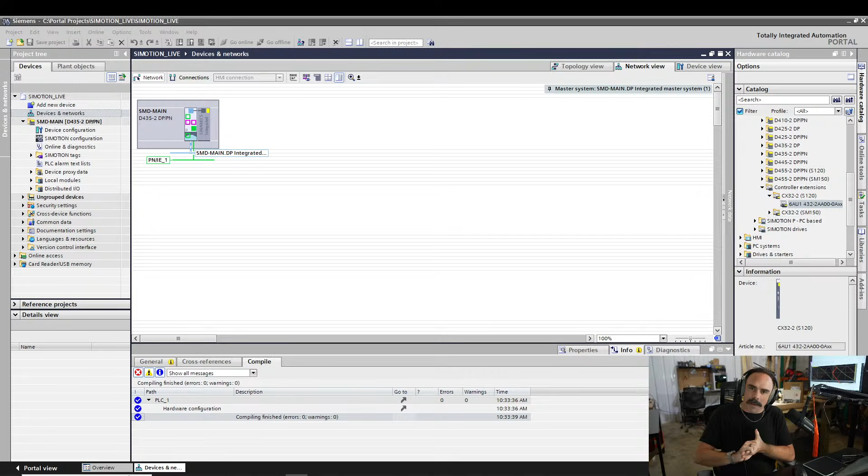The SIMATIC drive controller is a 1500T packed into the form factor of a CU320-2. So it's the highest and newest hardware in terms of the 1500T, because they repackaged all of this CU320 functionality into the drive controller. The old software, before TIA Portal, before anything, was its own software package called Scout, SIMOTION Scout. SIMOTION is a full automation system platform, not just a motion controller, not just for motion and drives. You can run an entire line, an entire plant off of a SIMOTION controller, because it's just a PLC with a high-speed synchronized bus to drive controllers. Inside the SIMOTION D, it's all CU320-2, so it's all that S120 hardware.

And so that Scout package, for the longest time, when you had TIA Portal, which, let's be real, TIA Portal was an absolute dumpster fire when it came out. Those of us that remember version 10.5 remember you couldn't even save fast enough before it would be crashing sometimes.

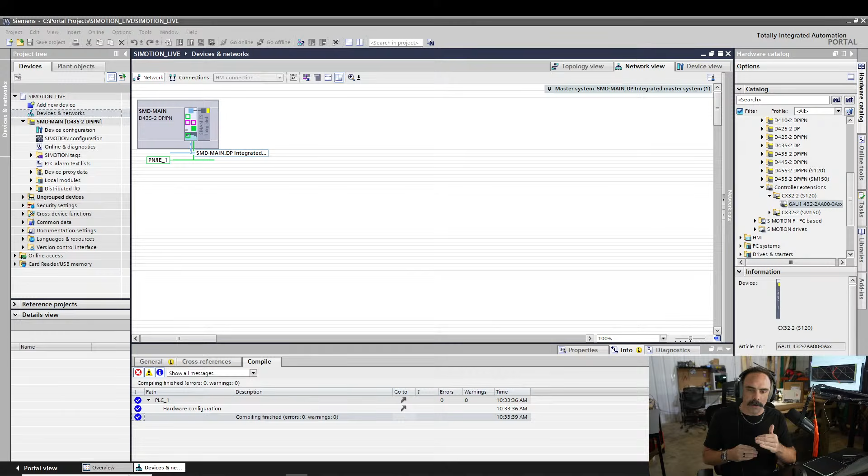Well, this version that we're going to be working with is what is called Scout in TIA. It's SIMOTION Scout integrated into the TIA environment, and it's kind of a halfway stopgap point. Let's be real. Here in a second, I'm going to open up the SIMOTION configuration that you see here on screen. I'm going to open this up, and guess what? It's Scout.

Basically, the only thing that it really did was take the tags and actually integrate those tags natively into Portal so that you could pass information back and forth between your HMIs, your different connections. Maybe you have some other Portal processors, something like that. It brings it into the Portal environment.

There was kind of a stopgap in the original versions of Portal where, what was it called? It was called a device proxy. Essentially what you would do is you would publish all of your 300 series tags, which the SIMOTION platform is based off of those 300 series processors. It would just export those into essentially a plug-in to where Portal could actually have access to those things. And it was really kludgy. You had to export. It was bad.

So this is Scout in TIA. This is SIMOTION in TIA, and it works really well. I was actually playing around, and this is the first time that I've started playing around with it, and it's pretty good.

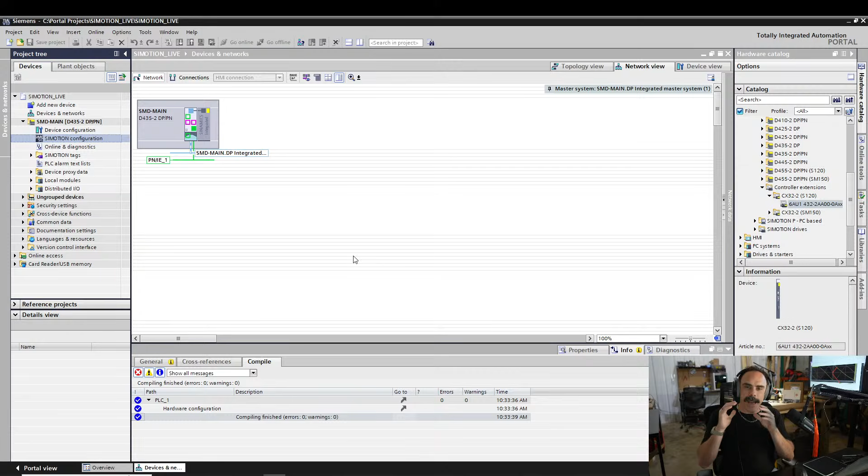And the only reason I was even playing around with it in the first place is because I had a customer I had worked with literally 10 years ago almost to get a system working and get them up to speed on Scout. I had a lot of experience with the S120s, a lot of experience with motion and all of this stuff. So I was like, okay, instead of you having to go through and take 3 or 4 classes to get up to speed on just the basics to where we can start talking about SIMOTION, I'm going to go take the hardest SIMOTION class, dive into this, and then sit down over the course of 3 days and just one-on-one get you up to speed on everything.

And so guess what? 10 years later, that system is now being upgraded, and they've taken this system and just run with it. And they've done an amazing job with just going through and taking what I was able to teach them in 3 days and really taking it to the next level.

And so I've gone back in and said, okay, how do we take this into the 1500T? How do we need to go to this? And so that's really kind of the only reason I've gotten back into the SIMOTION for this, is just because it's like, all right, they're moving and migrating into the 1500T. And so I'm kind of helping them out in that.

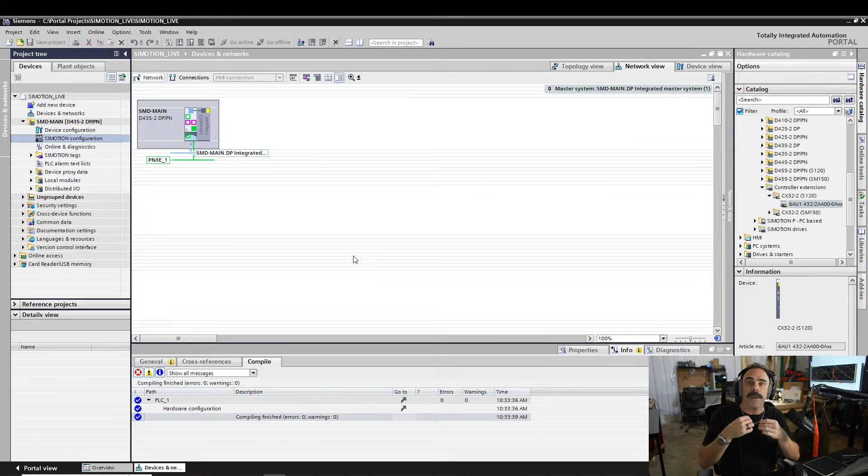So what I've done is I have a 21-day license that you could go out and download. If you have your version of Portal, you just need whatever version of Portal, and then there will be a SIMOTION Scout in TIA for that version. I'm using version 17 just because that's what they were using. And then you can, not download, you can activate a license for the Scout that is a 21-day license. And that is what I've done.

I've got 14 days left on it. And so that's why we're doing this stream this week. So Ali Reza, you can thank my customers for finally making this stream possible for you.

But so you can do this exact thing on trials. And again, if you're a member, you get access to this file. And if you open the archive, then it'll probably say, hey, you don't have this Scout in TIA package. So you download it from the support website, activate the trial license, and then you'll be able to open this thing up.

So TCPUs have been upgraded enormously. Yeah. Oh yeah. And the 1200 G2, Teddy's in here kind of talking about the new technology. New technology is just light years above where it is, because you have multi-core processors that have been in the TCPUs for so long, and they haven't even really been using them. They've only been using the other stuff.

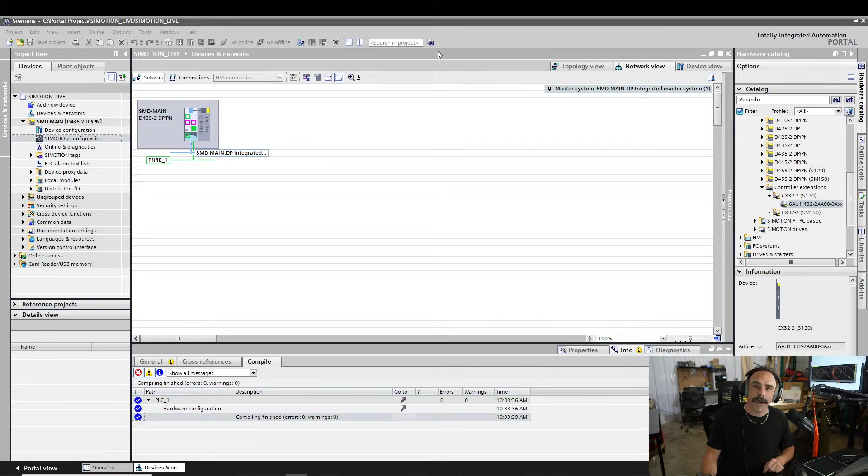So look at that. SIMOTION Scout. Oh, it's behind my head. Look. Oh, you missed it. I just got a little pop-up that said your license expires in 14 days. Just what we were talking about.

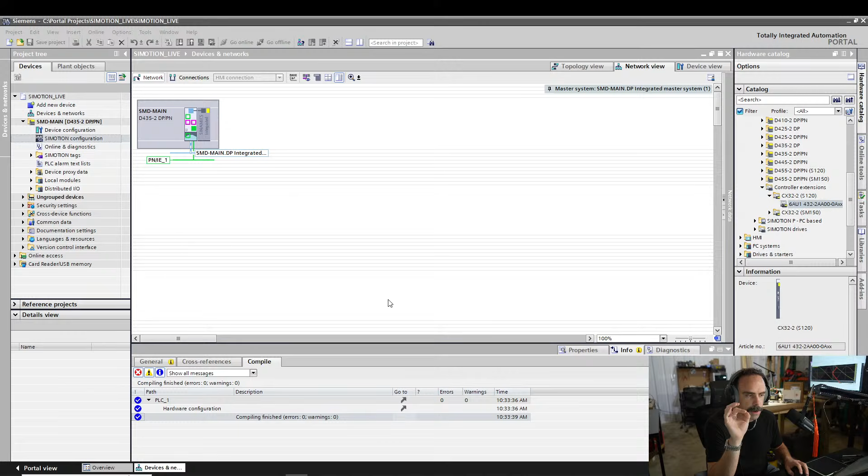So let's go through. And the first thing you're going to do is, again, we're talking about the SIMOTION D platform, and it has this integrated platform. When you have the SIMOTION in TIA, in your hardware catalog, under your controllers, you'll have your 1200, 1500, SIMATIC drive controller. There you go, Teddy, right there. 300s, 400s. Well, when you install the package for the Scout in TIA, you get this SIMOTION, and then it has all of your different options.

So I've just thrown in a D435 here, because, well, that's also what my customer is using. So yeah. And so I've thrown that in there, and I want to show one thing.

I'm sorry for constantly, my nose is a little itchy. I've got some allergies, some dust and smells and stuff here in this shared space or warehouse is making my nose go crazy.

But what we've got here, when we bring this in, this technically is the entire automation system. It brings in a 300T CPU, the PLC, and the default name on it is PLC1. So it's coming in as a 300 series processor and what is called SINAMICS Integrated. And that is a CU320-2, all built into this one SIMOTION D platform.

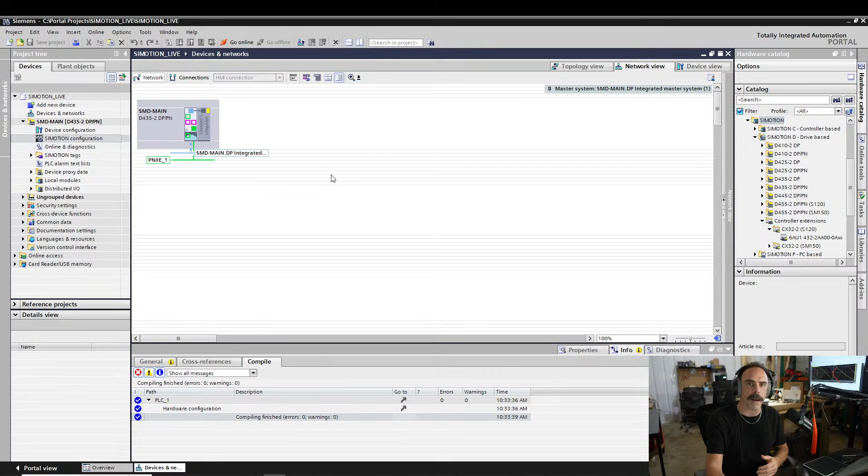And that's really all we need to do for right now, because you don't have to integrate the communication between the controller and that CU320. We don't have to do that. I'm going to talk later about if you have to use what's called a numeric expansion, or I guess it's not a numeric expansion, NX is on the SINUMERIK. It's the CX module, the CX32. The controller extensions, because CU320-2s can only do 6 servo or vector axes.

So if you need more than 6, which these controllers could absolutely do more than 6 axes of motion, then you're going to need more processing power. You're going to need more CUs. And inside this SIMOTION platform, it doesn't use the CU320-2.

It uses the CX32 module, and we'll talk about that a little bit. Actually, let's go ahead and talk about it. So if you need to extend that, you're just going to drag one of these in. And when you do that, you have your CX module. And then when you go to assign to your controller, this looks very different than what it would be assigning like a Profinet device to a TCPU.

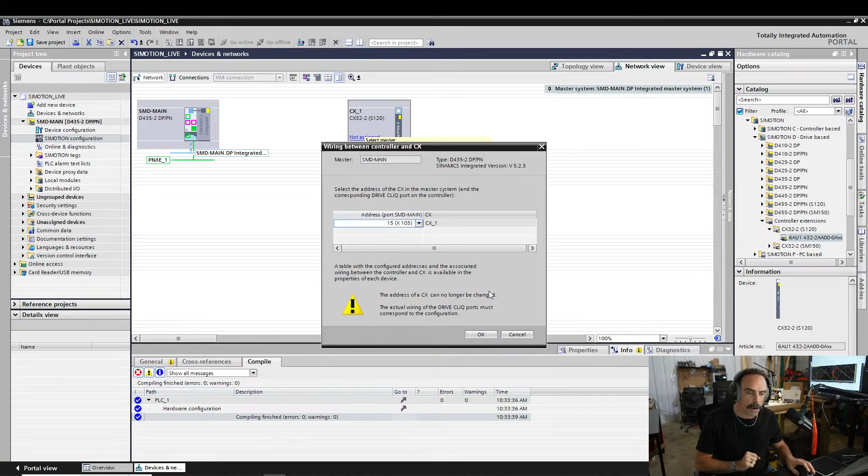And that is because this CX module does, remember that isochronous, that synchronized bus is Profibus. It's kind of like behind the scenes going on in this controller. So what these CX modules actually do is they hijack a DRIVE-CLiQ port, and then you're using the DRIVE-CLiQ port to kind of extend this high-speed bus. And so that's what this is about, what's on the screen right now. So if you're setting stuff up from scratch, you could just say okay, and it'll bring this in. Now, I'm going to go ahead and save this.

Now, let's look at the SIMOTION platform. Normally, you would just double-click on this. I've already opened it up because I wanted to make sure it didn't crash my computer. But here's what we have. And this, to kind of like the old school Siemens engineers, this looks very familiar. This looks like Starter, because guess what? It is built off of Starter.

And the big difference is because it has all of this other stuff in it, it has everything that Starter can do in terms of drive functionality for the S120s and things like that. Then it has all of this motion control processor functionality, and we're going to be going through all of that stuff. So take a little bit of a break, catch my breath.

How y'all doing, chat? Y'all doing all right? Because probably want to take in a deep breath, in through the nose, out through the mouth. Get that kind of like power breathing going.

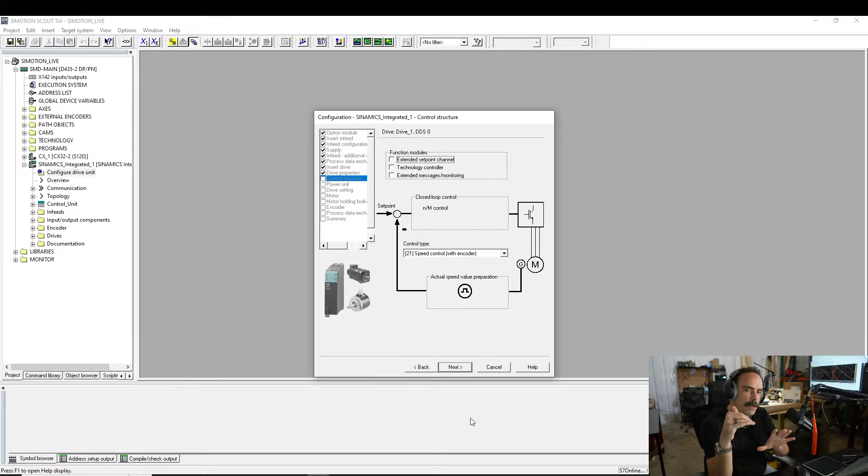We're going to select the technology, and if you notice, this is combining a bunch of the wizards that you would normally do. Normally you would set up your infeed by a wizard. You would set up a drive, a motor module, by a wizard. Well, this is combining all of those into one thing. So we're just going to do speed control with encoder. We're just going to click through these.

It's servo. These are usually the ones. Yeah, so this is the new one. So we've got the 080. So this is new hardware, new-ish. We want US units because we're in the US. I should do this because probably at least half, if not more, of you guys are not in the US. But for this, we're going to just use a DRIVE-CLiQ motor, like a 1FK7, 1FT7, something like that, 1PH8 with a DRIVE-CLiQ. We're just going to click next.

Obviously, all of this stuff is offline, so I'm not going to be able to show you online how to tune things. This is just the introduction, showing you how to set stuff up. And a vacuum cleaner is annoying. So let's just click through all of these and get through.

Encoders, again, this is exactly the same as you would do inside of Starter, S120, kind of the same wizard. If you've done these once, you've done it many times. So we're going to finish that. And now we're going to have an infeed and a drive, and that's really what we need. And just like in Starter, we could go through at this point and use this to tune and get our motors going as they should.

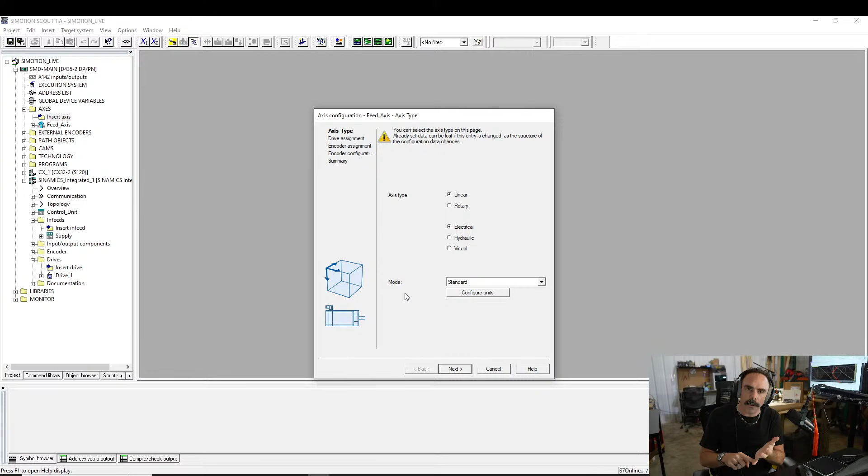In a linear axis, your units are going to be linear distance units: millimeters, inches, feet, miles, kilometers, whatever. Whereas rotary is going to be in degrees or radians, so degrees per second squared. And there's a reason why you would pick one or the other. I talk about those ad nauseam in the technology object streams, and those concepts are the same here.

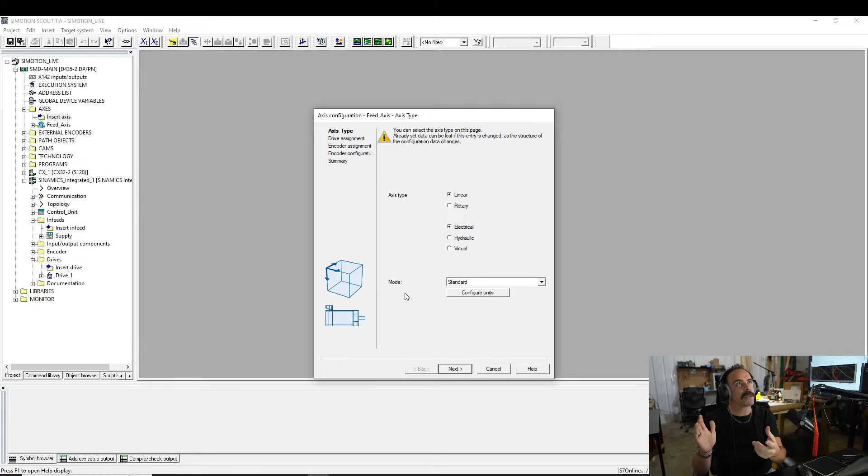Sometimes you'll want to measure things out like a roll, like a sheet of paper. You're probably going to want to do a linear axis for that thing that's measuring it. But you'll find that sometimes it's like, oh, my math works a little better if I do that in degrees, and then just convert the degrees to a linear unit based on the size of the roll. So just know that there are some times when you would go back and forth.

And just because it's a roll doesn't mean that it's going to be a rotary axis. Sometimes that roll is measuring out a linear distance. A lot of times people think, oh, it's on a ball screw, that's a linear axis, and then anything on a roll would be rotary. That's not the case.

So we're just going to do a linear, and this is going to be electrical. If you notice here, in a second, we're going to click this virtual button. We've done this before. Watch the Motion 102 stream where I actually go through the technology objects and set up on my demo unit back here, set up a cam, and it actually is going back and forth. And the only way that I can do that is by using a virtual axis.

Same concept here. Again, this is kind of the grandfather of the modern day technology objects. Same thing as in the technology object. You have to point that axis. A real axis has to have a real drive. You can absolutely skip over this if you want to just program it without an assignment. You can click here and then just say, like, you can unassign this.

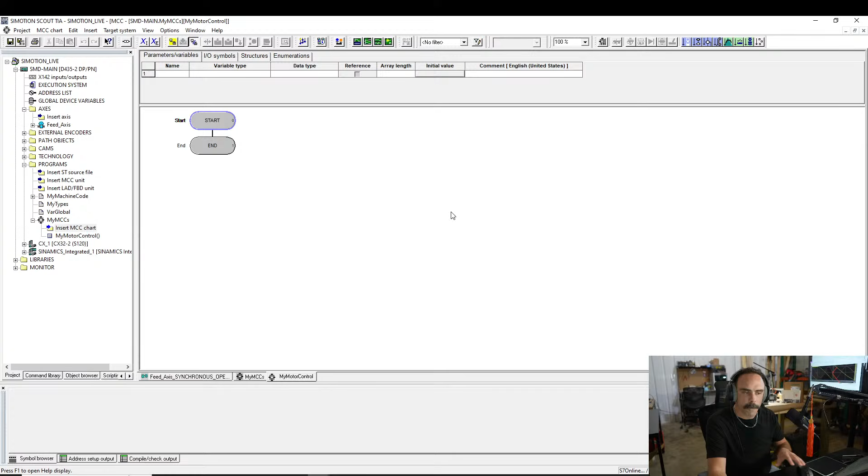Everything here is based on this flowchart structure. You come in and have these toolboxes at the top, with basic commands like if, then, else - program structure, that's the one I want. So let's make an if branch.

You come in and say, if, then I can enter a formula. If 1 equals 10 - which should never happen, right? So that's always going to be false.

Then on this branch I can put in something like enable my axis - switch axis enable on. I double click, and then select the axis for this. Very straightforward, very visual.

There's a reason Ali Reza said it's for lazy people - it's not that it's lazy, it's just that if you have basic functionality, if-then, here's when you want to start it, here's when you want to stop it, why would you not just click through and do it this way? And then that's how you do that.

Once that's finished, I can add in some sort of function like speed specification, meaning I'm going to run this axis at some speed. All you're doing is setting up all of your settings for that function visually. Pretty straightforward, fairly simple, but you can explore all these kinds of settings and diagrams.

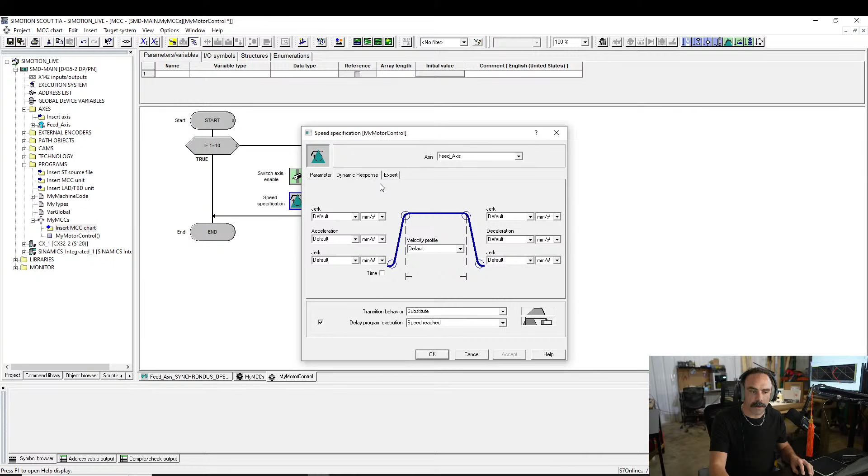So in this one, here's how you would set your speed, and you can select different variables, different things here. There's all sorts of stuff you could do - last programmed, resultant velocity.

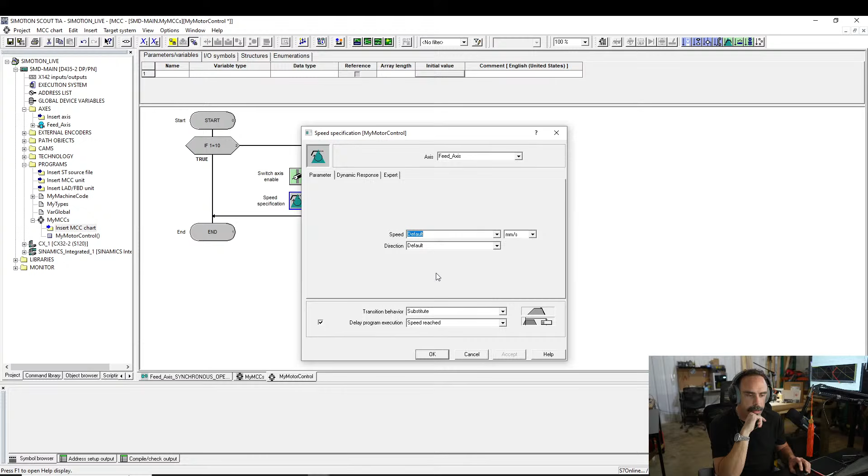I think it's not showing up because I don't have variables available to this, but that's going to be whatever speed you run at. Then dynamic response is going to be the ramp function for that function itself - you set everything up there. I don't know what's over here in this expert section.

Hold on one second... so yeah, so we say okay there.

So that's how motion control charts work, and they're fairly simple - you can go through and do all of these.

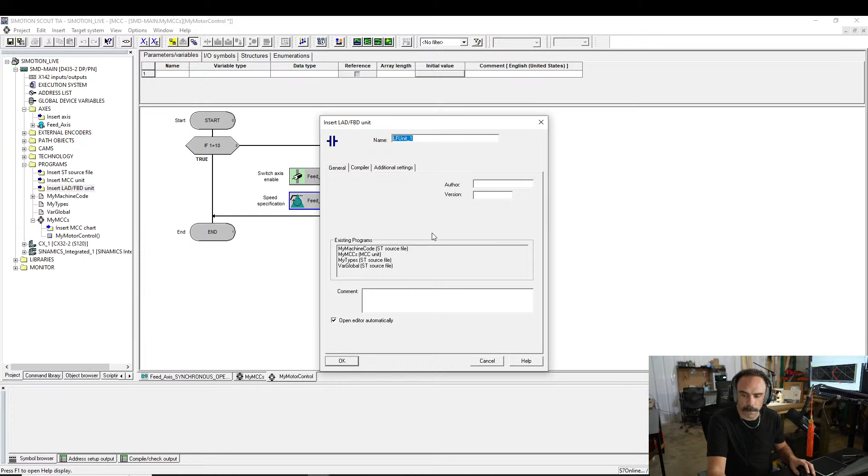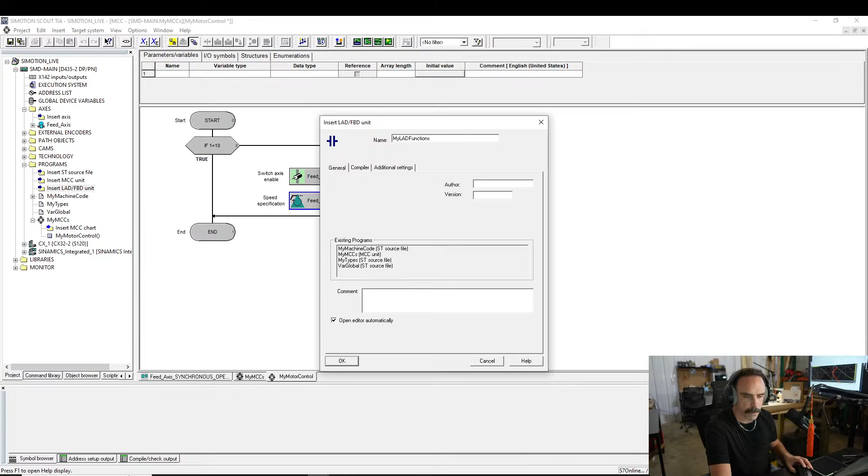Next thing is the ladder editor. I'll show you why you probably don't want to use the ladder editor. So let's go through this - let's go to my ladder.

Now we can go through, and the same way we did with the MCCs, we can do with the ladder functions - again, the creation type, is this a program, a function block, or a function? And if you'll notice something - nowhere have you seen the ability to create a data block. That's something very common, like, well, I need data blocks. We're going to talk about that in a second because it's not as straightforward, and I don't quite understand why it's this way, but I understand how to get around it.

So we're going to create a program and go into it. This looks exactly like your ladder editor in TIA, doesn't it? No, it doesn't - this is like some of the worst. This is quite possibly the worst ladder editor in the history of ladder editors. I can't even insert a network.

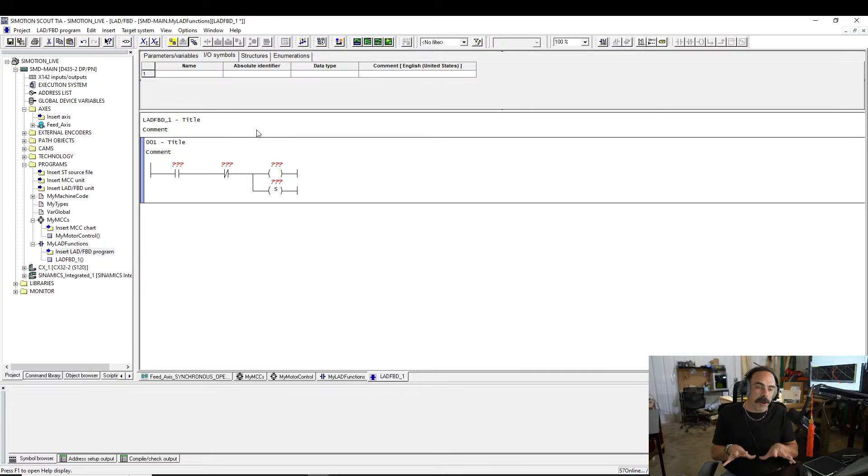Honestly, I don't see a lot of people using this ladder editor, just because there's so much better options, namely ST and MCC. The only reason you'd really want to use ladder logic is if you were taking push buttons and starting functions, with push buttons, IO, visually it can go through and do that sort of stuff. Because if you're using ST, why are you going to try to build some sort of math function in ladder logic? No. If you're using MCC, why are you going to trigger MC functions in ladder? You're probably not. So about the only thing you're going to be doing is sequencing, checking, is this E-stop here? Is this good? Those sorts of things in ladder.

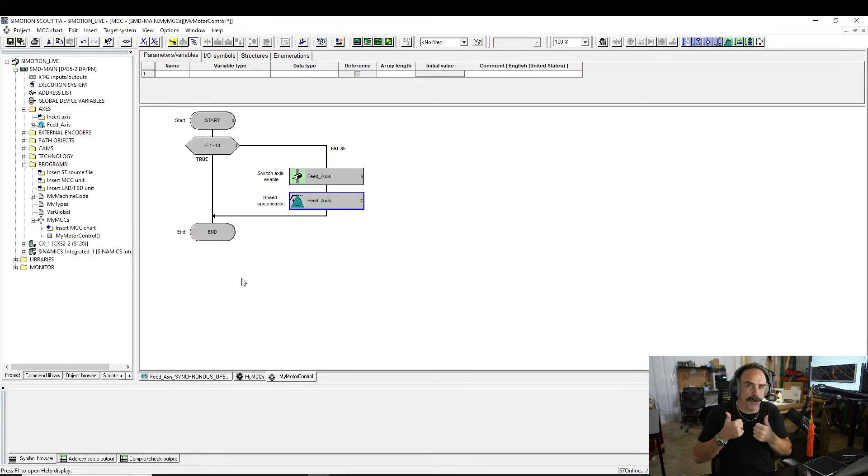I'm going to leave this here. Yeah, we're going to pretend that never happened. All right chat, we're going to pretend that never happened, cuz it was rough.

Sean's talking about the Mitsubishi ladder editor. I've fortunately never used the Mitsubishi ladder editor, apparently, because it's apparently horrible too. What's the Automation Direct processor? Not the Do-more, is it Productivity? Something like that. Anyway, it's pretty bad too, right up there with it. I mean, it's free, so you can't really complain if it's free, right?

We're gonna get into the real motion, real stuff now. Y'all ready? Because we're about to go into ST. And ST, my friend, by the way the music, I'm listening to EDM music and it's building up to the beat. ST.

ST is where it's at, and you're going to see it mostly across the board, because it is so much more portable than any other language we have. You have these code assist processors that use ST, all of this stuff. It's text based, and a lot of people are coming from ladder and these visual languages. They come in with no experience in text-based stuff, and that's kind of how a lot of us old school, gray-headed people like me, that's where we come from. We're coming from the non-text based stuff. Not me specifically, but most of us.

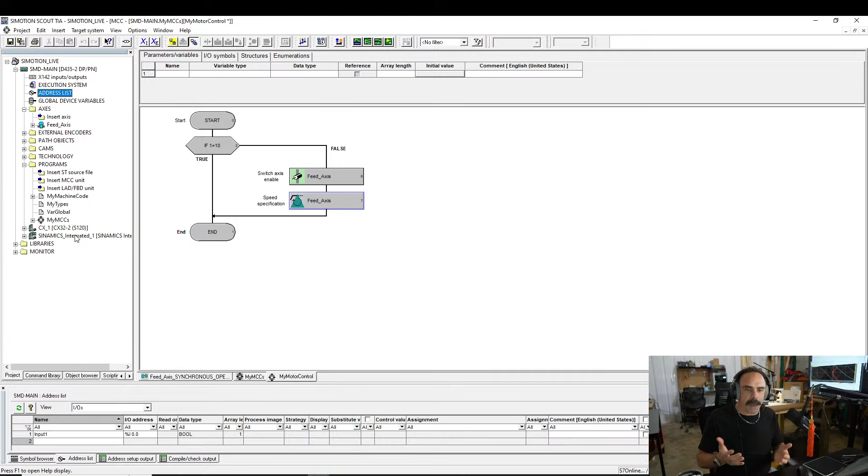That kind of sucks, because it just doesn't feel right, especially when you're used to every other system I've used. Maybe it's just the old way of doing it. You did this again on the 505 system, like in TISoft - you had your IO tables you had to set up. Why are we doing this? Anyway, end rant.

A little bit better way of doing this - and honestly props to whoever wrote this other code I've been looking through in different places. There's some better ways to do it inside the SIMOTION platform that are actually pretty good, and it creates portable code that you could take out and put into another device, redefine what these tags are in terms of IO, and start using those functions. That's portable code - the creme de la creme of programming, really.

Especially in motion control, you have a lot of different machines, different things, but most machines fall into similar patterns - you have torque control on an axis, speed control, gearing, camming. So from one flying saw to another, there's not going to be a lot of differences in the core program, just in the stuff around it.

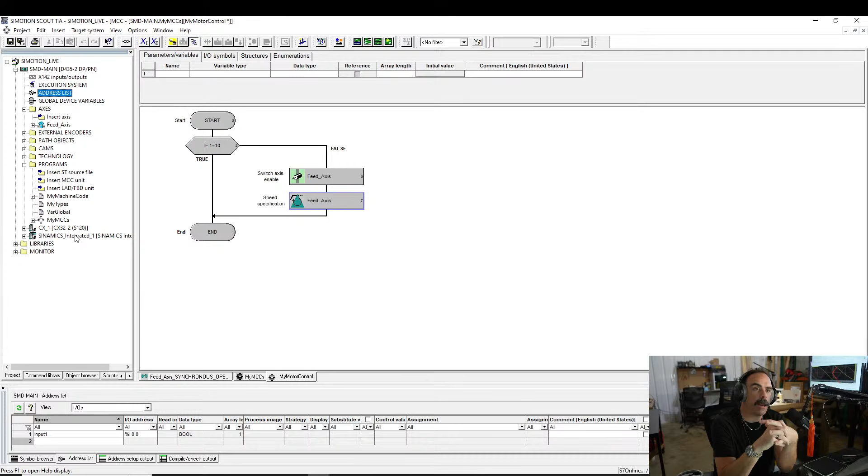Mika asked if ST refers to the same ST in the PLC we know, or SCL. In TIA Portal, on the 1500s, you have two languages that sound kind of like that. You have SCL, structured control language, the text-based language that looks like what we're about to do. Then you have STL, statement list, which is assembly language - machine code, hardware level, loading accumulator, transfer, add, accumulator to. It's rough. If all that sounded like another language, you're probably under the age of 25 - they don't teach that stuff as much as they did for old people like me.

So ST in this context is not STL, and it is not SCL - the two languages that are in the 1500 and TIA Portal.

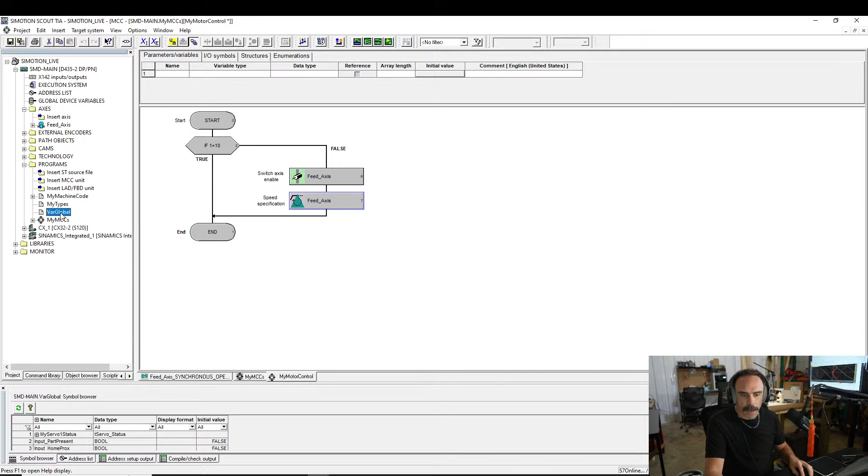SCL is very close. No, I'll talk about the difference. Let me just talk about the difference. So I'm going to go in first, and so I have this var global type or var global source file. And if you're not familiar with text-based programming languages, you're going to have files, and the goal would be to have one file that has a bunch of stuff that you commonly use, and then you have another file that's custom stuff.

And then you say, all right, I'm going to point and use all of this stuff, and then I'm going to have access to this. And then I can use whatever. And so as long as I have this file, it can run. So whenever I include anything, I just include both files to make sure that I have access to both files, and then I can run this file.

Okay? So instead of having DBs, which in the PLC land, in the 1500, you'll have a DB, and that'll be a global DB. And so that is access to data; any program that is running, any function, anything can have access to that data. And you do have that. You do have global device variables right here.

But again, they get down in this stupid thing that's right here to the side, this little thing right here. This sucks. That editor is cumbersome, it doesn't look good, and it's hard to step through and trace through. And so what I see a lot is, instead of using this global device variable and this address list, you split everything up into these global source files. And then you just include those in anything that needs those variables.

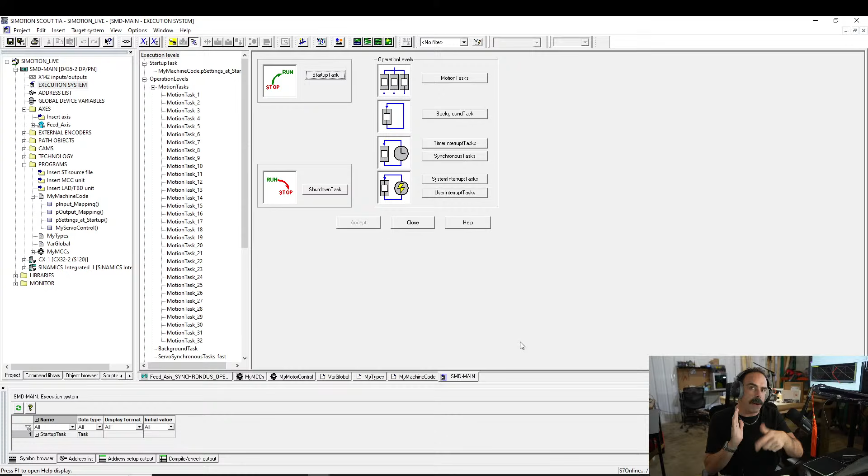That has nothing to do with the servo cycle. That has nothing to do with how fast all of the drives and everything are getting updated. Those are two separate things. And so if you have a 4 millisecond cycle time or a 10 millisecond cycle time, that means your main OB1 is running through every 10 milliseconds. And so it's totally fine to put stuff into main.

The problem with SIMOTION is you are running so much other stuff natively in things that are not in main, or the background task kind of has the lowest priority. And if you're unfamiliar with the way interrupts work, you have a process that's running and it's trying to get through this bit of code. And it gets to here, and this code over here says, hey, I have a higher priority than you. I need to run. And it says, okay.

And it goes over into this block of code, runs this, and then it goes back to wherever it left off in that lower priority, and then starts going through and says, oh, hey, I need to run over here again. And it comes back and then goes back over here.

And so that's, hold up, I just lost my battery.

So that is a thing that, the interrupt priority, it is much easier in SIMOTION to cause your background task to get really, really long.

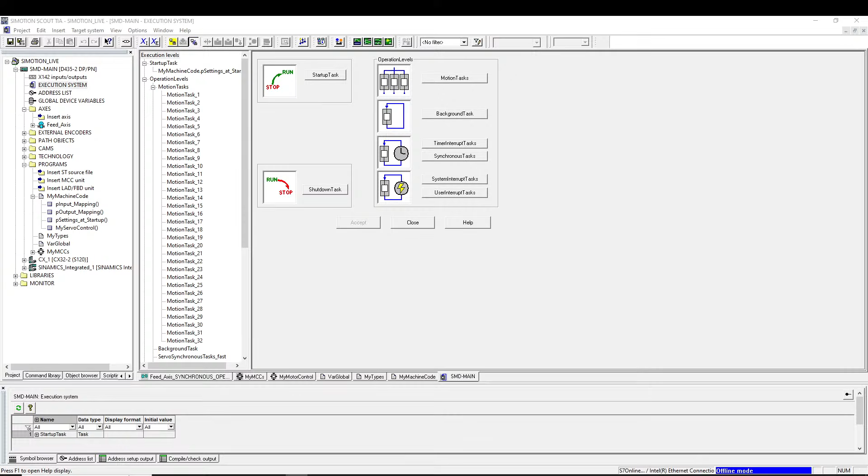Let me change my battery real quick. Little bit of a break. All right, that was much harder than it should have been. All right, let me get this back up and going. Not bad on that, guys. There we go. Should be good to go.

So Ignatius, my general from the African continent. So we got a question. Do you know how similar or different IRT over Profinet is compared to EtherCAT? So it's the same concept. I'm sure there are a lot of different things in the hardware and the network stack level. But the biggest thing is that you are synchronized. And so everything on that bus makes sure that it is synchronized into the right time.

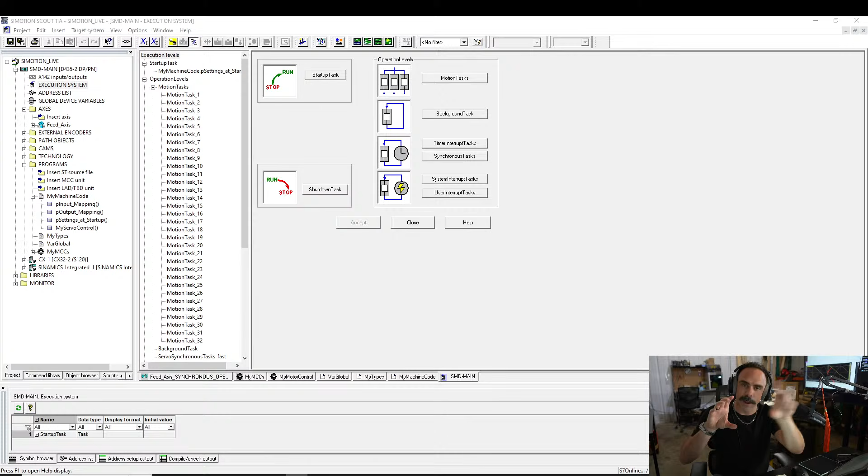And these interrupts are saying, hey, I've interrupted and I'm in sync. I'm syncing up at a certain amount of time. And so I'm always getting pulled over into this other synchronization thing. One thing about interrupts, if you don't have any experience with the hardware level architecture stuff, one of the rules of interrupts is if you're using an interrupt, get in, get out, don't mess around.

That's the rule. And the reason is if you try to do too much in an interrupt, then you're going to have a bad time. You're going to start interrupting interrupts, and then you're going to move into situations where all... right, there we go.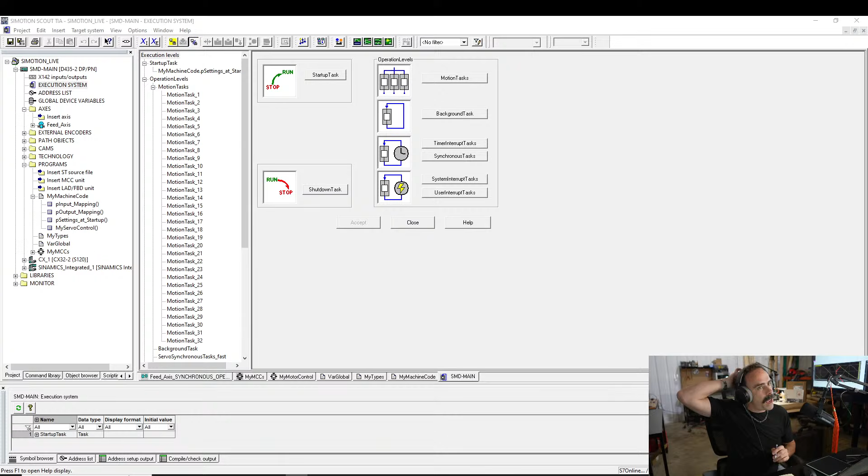We're going to move into a situation where you overflow, and it's a possibility that your background task or your main starts to overflow, which means if you interrupt an interrupt, you're going to have a bad time, especially if you interrupt by the same interrupt. If the same interrupt interrupts itself, you're done. It's dead. You're lost. Literally, your process goes away because it will never complete, because you're always interrupting yourself, and so it just goes off into nowhere.

Oh yeah. So Lucid's talking about a couple of good questions here. The first gen were pretty bad, had a lot of motion in it, eventually changed it in the second gen. Yeah. So Lucid, just in terms of the first generation T processors, 15T processors, and the second gens.

I still don't exactly know what those issues were, but talking about using two cyclic interrupts in regular TIA programming: if you have a 100 millisecond interrupt that goes off every 100 milliseconds, and if they're the same length, try to offset them. There's a phasing parameter that's set by the first scan. It sets that system time, and it'll phase those out so that they actually get updated. The problem is if you're doing that, then your data is always one scan out.

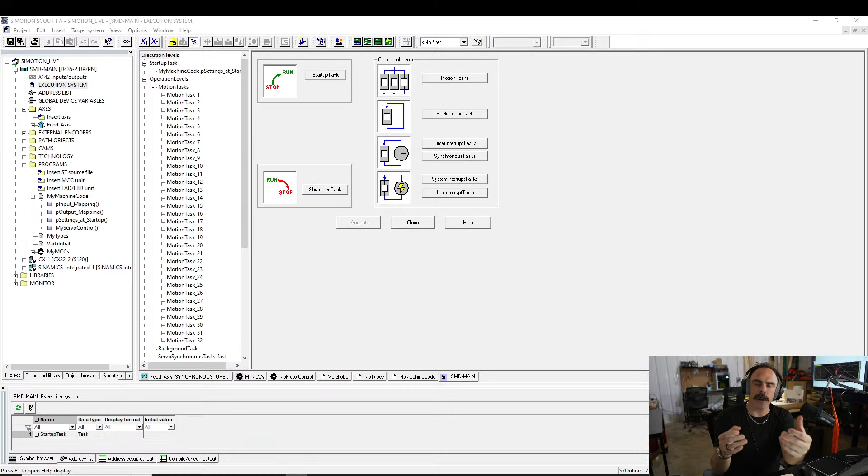Well, with a synchronous bus, you're wanting everything to be synced up. On all synchronous buses, all of the peripheral devices gather their data and then have it ready on that synchronous bus, and they have a time slot that they're taking. On the bus they're not having to call up the actual regular communication stack; it's sitting there waiting. They just put their data into that slot. As that data is coming across the bus, it just comes in and then it gets dropped in.

So that's the secret sauce behind SIMOTION and why it was so powerful, because serial data is so obnoxiously slow if you don't have synchronization like that. You're literally queuing up all of the data on these two wires on Profibus and stacking the data. Instead of sending out all this data, it's timing this guy so it shoves all of its data onto the bus at exactly the time. By the time it gets to the processor, that scan cycle is exactly packed and synced up, and boom, drops it into the processor.

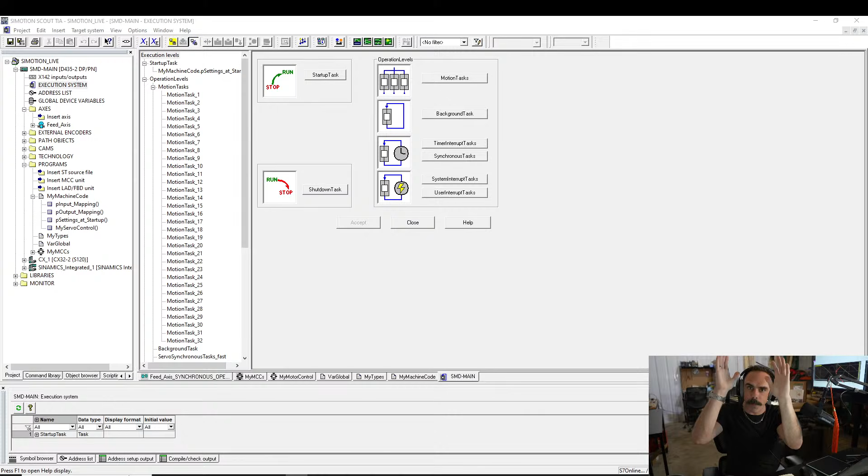Immediately at that point, it will have this servo scan cycle, and you do all of the updating and information in that, and then go back and go from there. If you're using a motion controller, the point of using a motion controller is to control motion. That's why most people will have a secondary PLC for most things, doing regular IO. It's passing back and forth like, okay, we're ready to go, you can do your motion. Cool. And then the motion processor goes around and does that.

So let's talk about putting these tasks into something. Just show you real quick. Let's click on our startup task, and you can see all of our programs that we have available to us. This is our startup task. I want to load, all you do is just click over. I'd already done that, but P settings at startup. Just click, I load it into this, I say okay, and it's there.

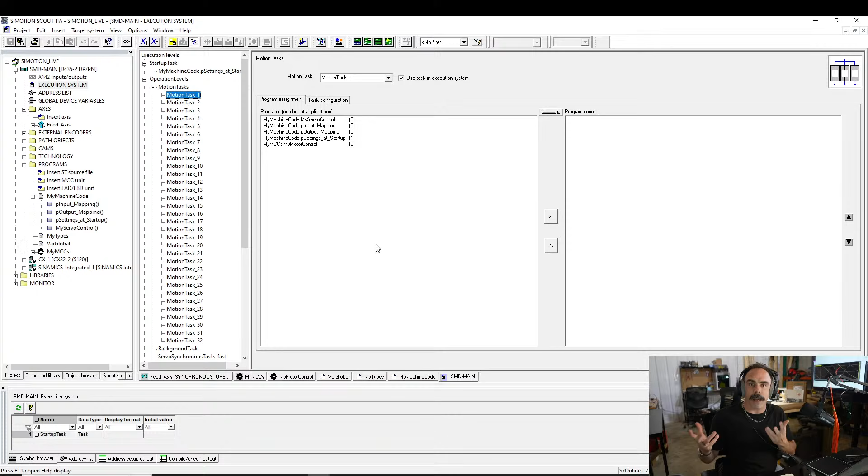Now, I'm going to go into motion task 1. And you say, okay Jason, what is a motion task? Well, the thing about a motion task is it can be in parallel. So these can be infinite. A way of organizing in SIMOTION is if I have my motor control, which is my motion control, it's an MCC chart. Where is that? My motor control right here. I can use that in task 1, and then I can loop that.

So if I wanted to go into this and put here a while loop, like while, like this.

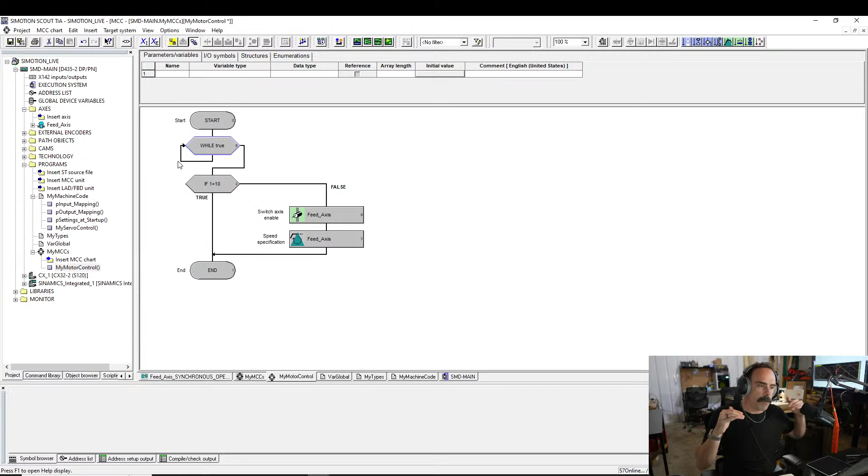How do I get that out? Anyway, you could put that while loop around there and just have it run infinitely. You can absolutely do that in a motion task. It's not going to kill you. It's not going to hurt you doing that. And so basically when you want to start up that motor, start it up, go through, you do that.

A better way, instead of having an infinite loop like this, is to have some sort of flag that says while shutdown not equals true. So while it's not in shutdown mode. In your startup subroutine, you set that flag to 0, and it doesn't ever get set until you are trying to initiate a shutdown.

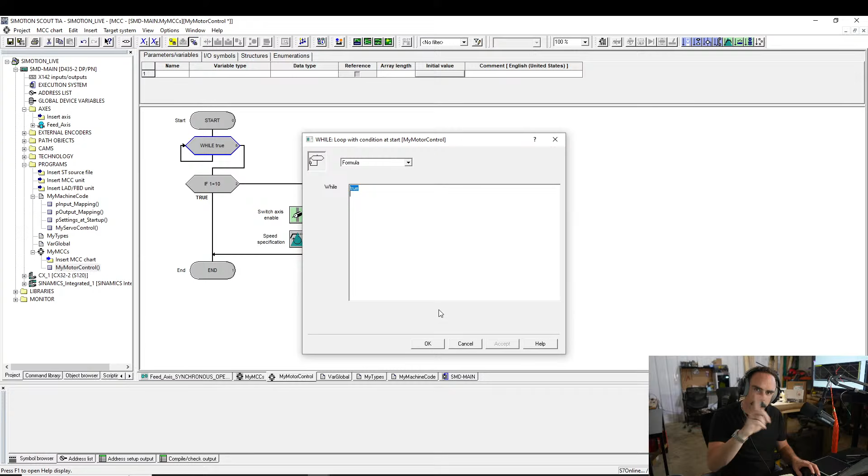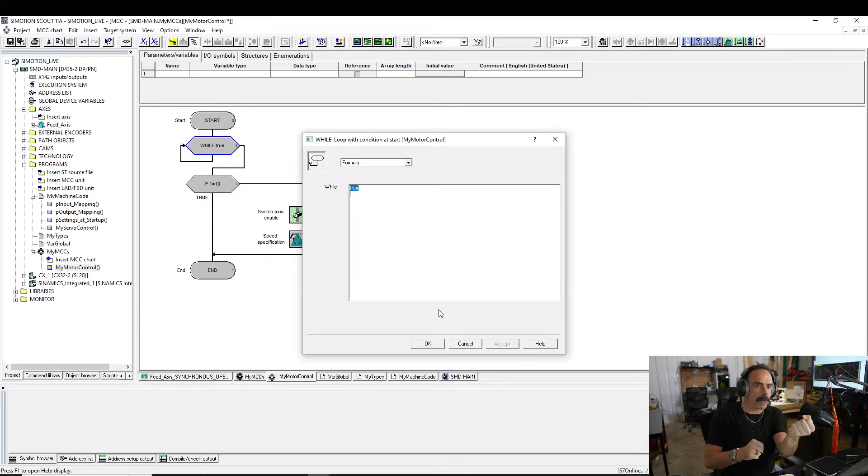And then outside of that, you can do shutdown motion stuff, because there's a little bit of a difference. You saw that shutdown task. Yes, you can go through and gear off motors, because if you go into that shutdown task, then it's going to run through all of those things. But remember, you're not always going to be going from run into stop, right? That's the only time that task gets done.

So that's a compile. I don't even know if that works, but yeah. Let's go back over here.

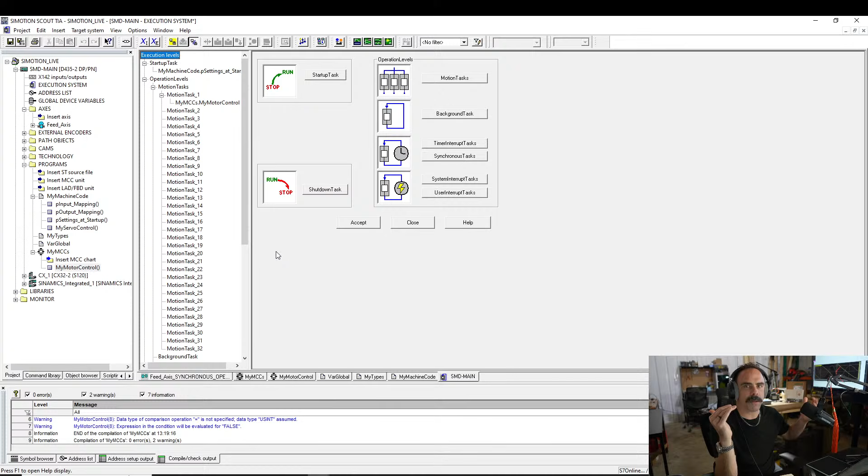So our execution levels. This run to stop means your processor is going into stop. So on your normal shutdown of your machine, like on a Friday, you're gonna hit stop, shut down machine, and it's gonna need to sequence out. So you can either control those motion tasks, where it gets activated and then goes through, and then have a shutdown task that's pulling things off, or you can have some sort of flag.

But either way, those motion tasks can run, and they can sit there, and they can update, and they can do things. It's kind of like taking, inside of OB1, a block, like a function call, that has the possibility of being only called once, and it runs through once, and then it's fine. But then it can also go through every time, you know? So just know that they can be parallel.

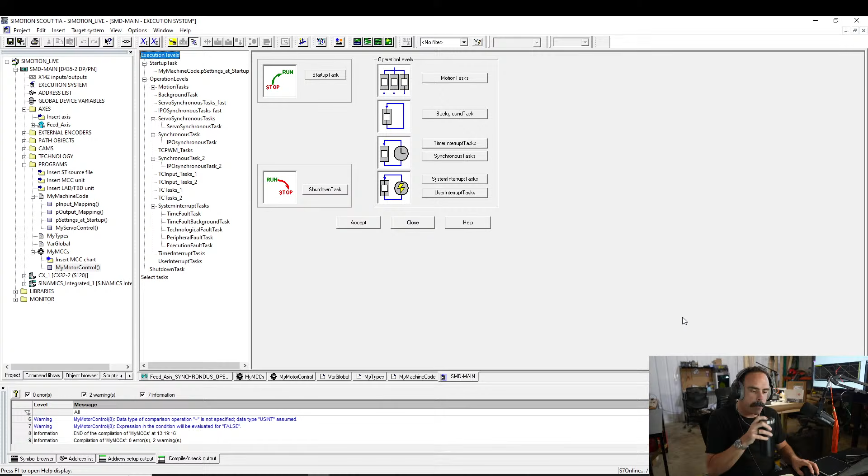And then the last ones are going to be the synchronous tasks. And those are going to be the most important ones in terms of what we're talking about right now. Because there's two synchronous tasks that I want to talk about. So you have a servo synchronous, which, to go ahead and tell you, don't put anything in here.

This is the one that has the highest interrupt priority, and if you want to Christmas tree this thing in the middle of your process, which means all the lights go on because everything stops working, it just wigs out. If you want to do that, jam a bunch of stuff into the servo synchronous, and at some point you're going to put enough crap in there that it's going to interrupt itself, and then it's gone.

So what you should be putting things into is this IPO synchronous task. For example, if you want things to update at a certain rate, no matter what, and for all of your machine data, this would be comparable to your pre-servo, post-servo type things, if you're familiar with those. If you're not, don't worry about it. If you want to make a decision based on some sort of input, output, signal, and make sure that it's getting updated at the same rate as everything else, you're going to put it into this.

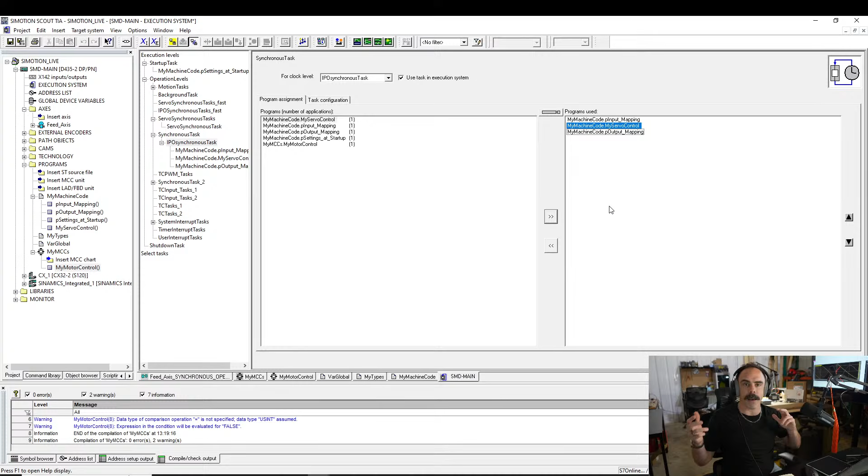There we go. And then I'm guaranteeing that this stuff is getting updated every synchronous cycle. Now, if I get too much crap in here, and my servo synchronous cycle starts to interrupt this, it's not going to crash. It's just going to cause problems where my servo might be getting data that's not quite updated in terms of the inputs and outputs.

All of the technology object stuff, that's going to be fine. It's going to have the encoder, it's going to have all of that information. You're going to be good. But your data might not be synchronized properly if you put too much in here. So you want to do things that are really low priority, like an LED light, because we're talking on the order of, say, 1 to 4 milliseconds of updating on the servo cycle.

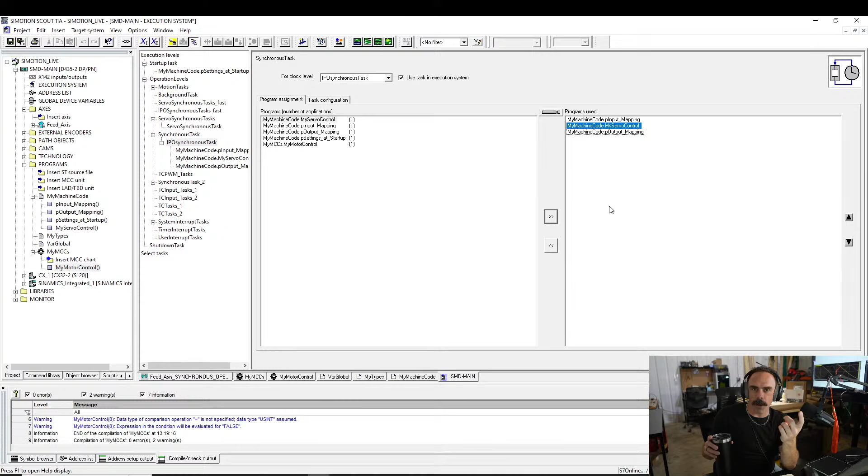And then if it's really updating fast, your light might be 10 milliseconds getting turned on. Your eye can't even perceive the difference of 10 milliseconds. So that sort of stuff should not be in your synchronous cycles.

So, wow. It's 2.5 hours. Oh, goodness. I thought this was going to be a quick stream, honestly, because I thought I wasn't going to be able to talk long about this stuff.

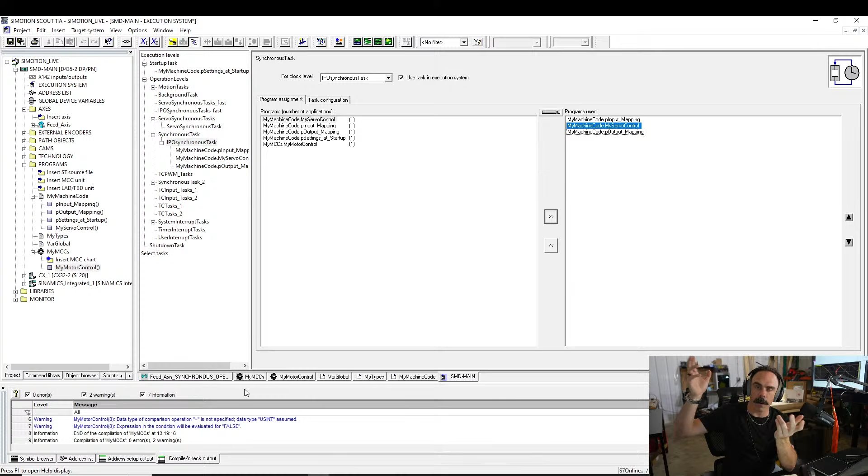So, I was wrong. I wanted to talk about how to trigger a motion task, because remember, we said there is a possibility that this thing just runs once and goes out. Well, what if you wanted to re-trigger that? Because that motion task gets triggered once. Let me look at this. I double click here and go to task configuration.

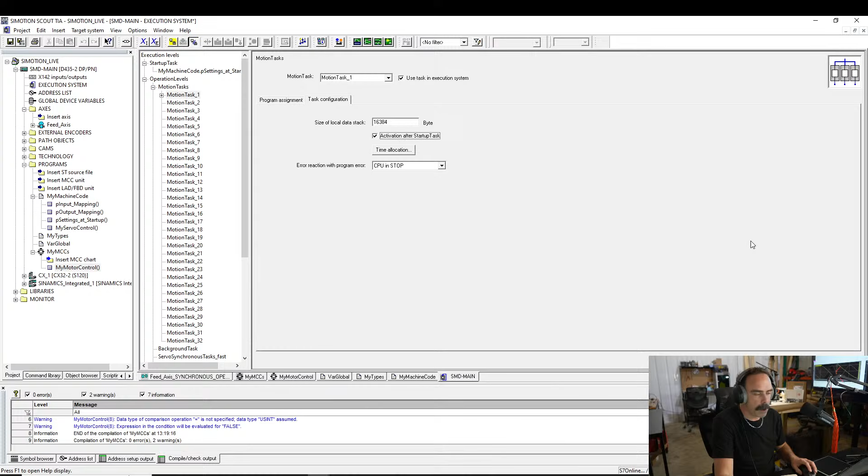If I don't check this box and I never activate or trigger that motion task, then it's never going to run. If I check this checkbox and say run this task once at startup, and I don't have some sort of loop inside of that motion task, then it will run once and fall through, and you have to re-trigger it. I'm going to show you how to re-trigger this. I'm here in the program execution system and the task control commands.

So if the motion task is in there and it's running, in the middle of a motion task, this will do nothing. It will continue to run. If you start that task and it's in the stopped state, it will start that motion task, and it'll run whatever is set up in your execution system for that motion task.

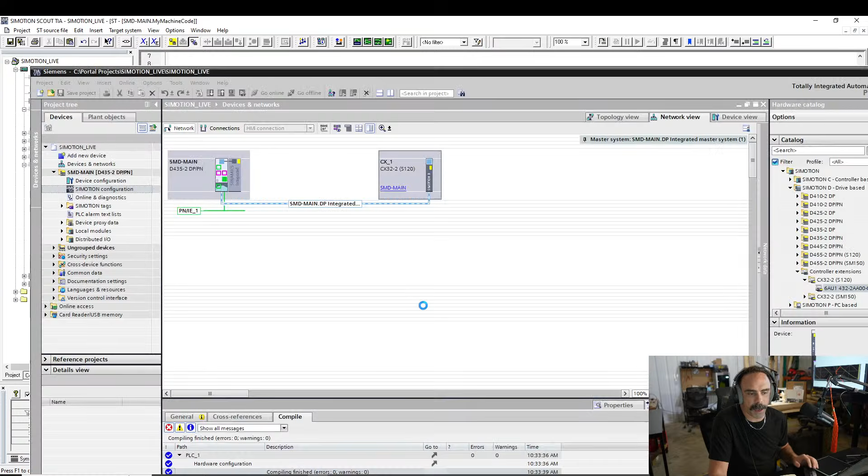I'll show you. So we're going to click save and compile, and it's going to bring all of that information out here. It compiled, and now it's done. Okay, we go to SIMOTION tags.

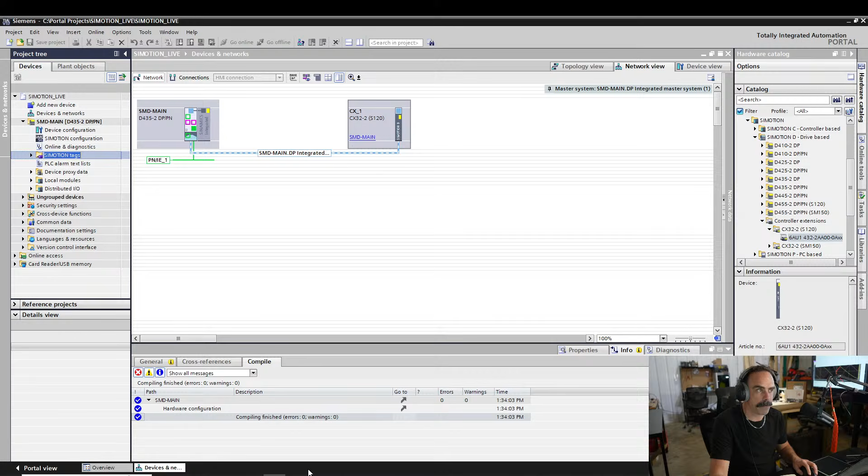And my computer's going to die. Are you gonna click? Oh, it might be dead. It might be dead, chat. Oh, there it goes. Oh, it might be dead. I'm just gonna listen to music. I don't know, chat, it's dying a slow death. Are we dead here? Oh, it's not looking good, my fans started on. So what you would normally do is find the mouse. Which screen is the mouse on?

Okay, it's not liking this, chat, but anyway, you would go to the SIMOTION tags, and all of the tags that are in those different groups, like the source blocks, anything that we created, a tag that was inside of that, would be available to use just as a regular tag.

And hopefully, are you gonna live? Are you gonna live and show me the thing? Or yes, okay, woohoo! So we're gonna double click show all tags.

Oh, it didn't like these. Why didn't it like these? What? Okay, be fine, anyway. So I click on this, right?

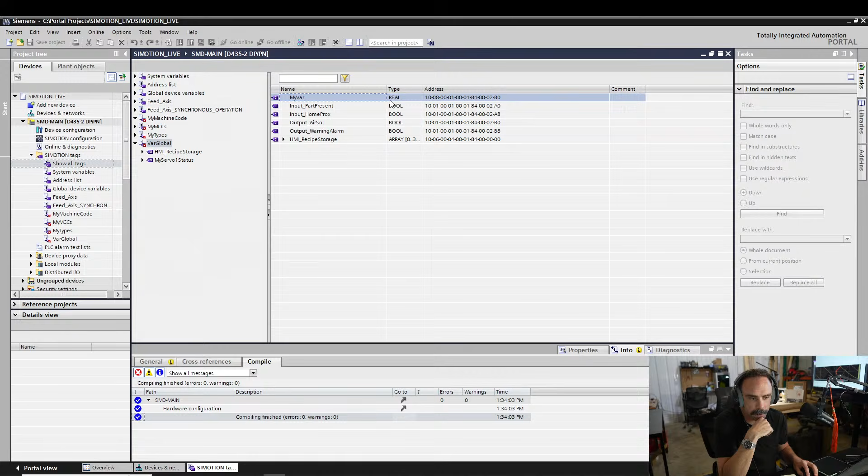I have the ability to drag and drop from here. So here's all of my tags. And there's an interesting little thing about this, and I want to show you this. See this crazy address, some weird stuff, whatever?

Yeah, it's crazy. Here's the thing. If I come in, all right, I'm going to throw an HMI in here real quick, okay? I really have to pee, by the way.

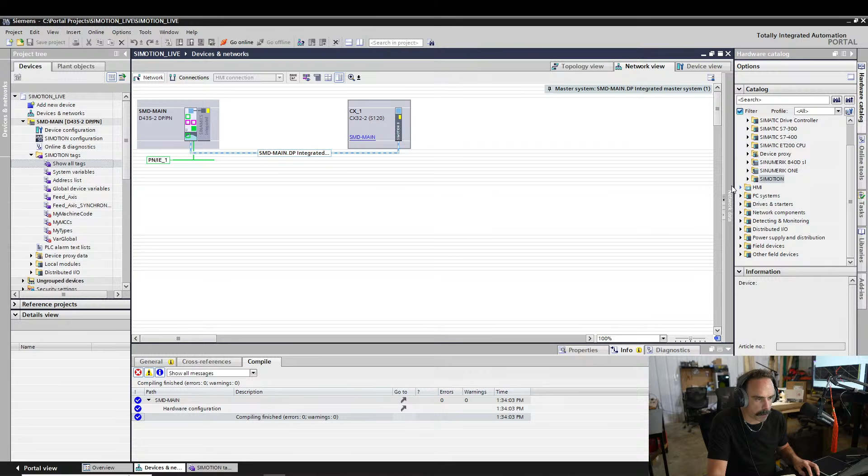No, we're not using a basic panel on a SIMOTION system. Who would do such blasphemy? Oh, this might kill it. All right. Hopes and prayers, prayer hands in chat, prayer hands in chat. Okay, it made it. It made it. All right. So we're gonna go through and make a screen.

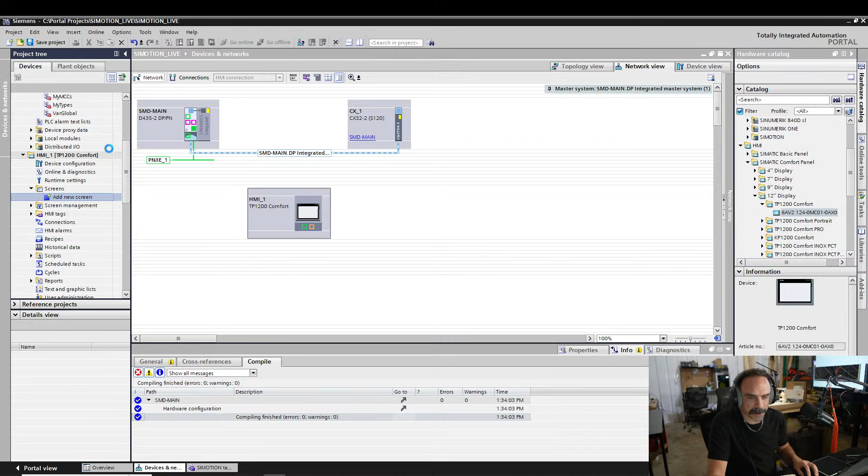I'll show this to you real quick, how you can actually use this stuff. So you have like var global. Ooh, I'm clicking way too fast. But I could go through and be like, here's my home prox, and just drag this in here. And it makes that link. So you can see the properties on this, that it is linked to that crazy address.

So I'm going to talk about how this is possible, and apparently it's not just straightforward. This little HMI export here is based on something that I skipped over when I was talking about it before. But if we look at these retained variables, which you would want for most of the stuff on the HMI, like your settings, you have this setting that says HMI export equals true. I have it commented out, all right.

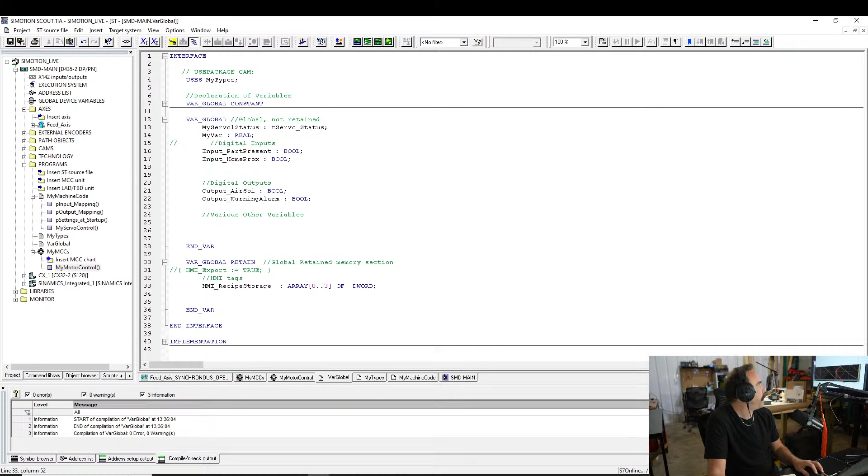And I'm gonna bring this over from here back over, and I know when I turn around like that you can see my bald spot on my head. So y'all are special, chat, get the real me. And we're gonna go. Let's see, HMI export.

Maybe I'm not going to find this because I forgot where it is and didn't write it down. But it talks about it in here - this HMI export for any retained or non-retained variables. By default, any global variable that you put into an interface is going to be exported out to an HMI.

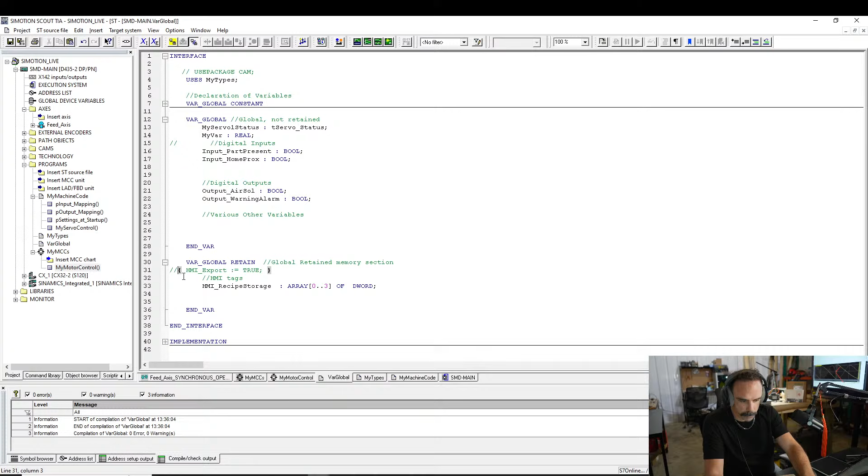So any retained or non-retained variable is going to be visible in the HMI. Think about it in your data blocks - you have that 'visible in HMI' checkbox. That came out at the same time as this change, so you can go through and if you don't want these variables to be visible in the HMI - accessible via this crazy address, I don't exactly know why, it just does - you can change this to false and it'll kill that address. Otherwise, by default, it will create that address.

So you can create a segment with the variables that you want exported and the variables you do not want exported, and you use this HMI export option.

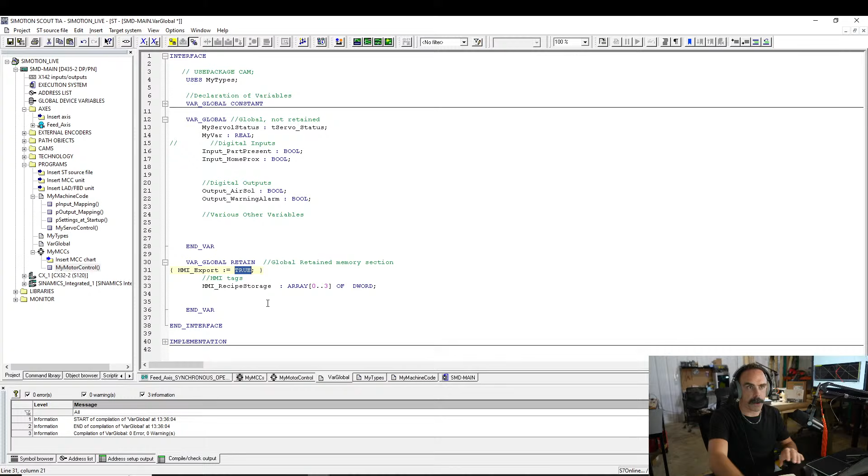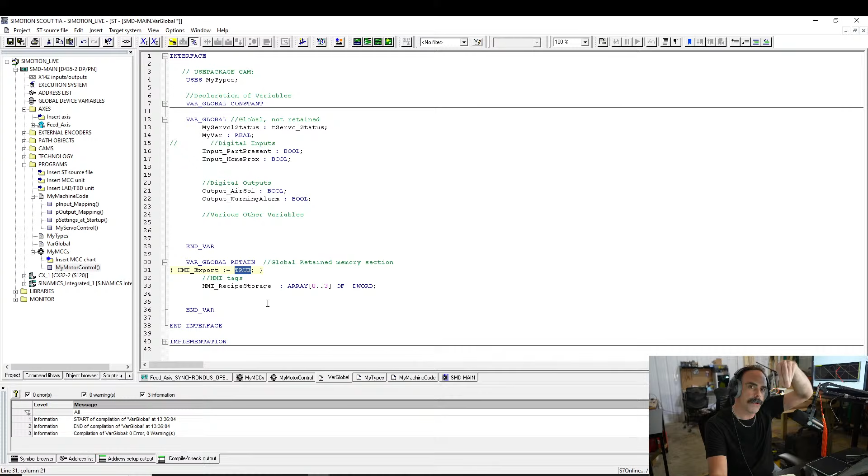Ali Reza in chat is talking about the device proxy. The device proxy is available - it's the older way of doing it. If you are doing a standalone version of SIMOTION, use the device proxy to bring it in. You export all that stuff into the device proxy, and then the device proxy has all of the tags and things there. It's pretty fun.

Notice how I did this - in the SIMOTION tags I opened it up and clicked on these. Remember, these are my source files, ST files. Because I don't have my var_global flipped to false on that HMI export, everything's accessible, and it has that crazy address I can use over here - I can just drag and drop into it. So that's a cool thing.

So for about 15 minutes, maybe 10, I'm going to talk a little bit about one of the questions that comes up.

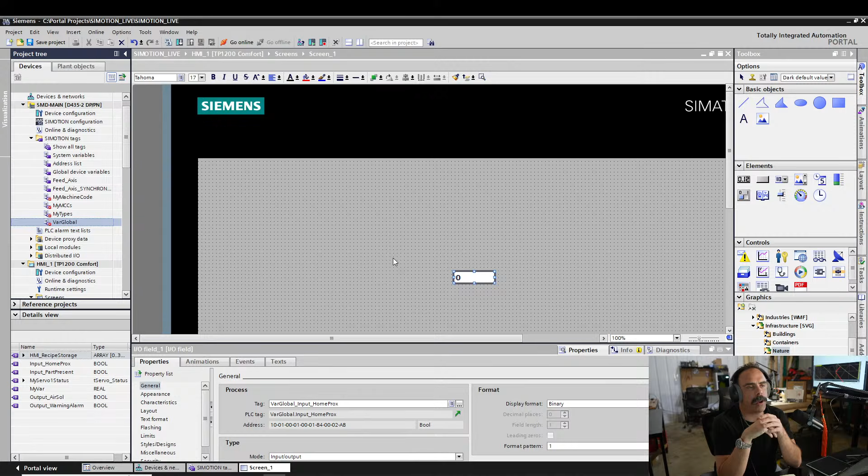If you're familiar with the technology object method of controlling these drives, you'll be like, okay, well you said these are T CPUs, all that stuff - well, can I use the technology object functions, those MC Power, MC Reset, MC all of that stuff? Well, guess what? That's actually what you were using.

In your functions that you were using - like for example, I deleted my crappy ladder logic because you have a little function thing here. So my command library, these are kind of like... what is it in... it's not technology, it's instructions. My Instructions tab on the right-hand side - that's the equivalent of this here.

Well, technology - let's see if we have, there should be... where is it found? Not common functions. These are Get Object, Drive Access, Command, Hydraulic, blah blah blah. If you'll notice, most of these functions you're using are MC functions, and they are the same thing - I don't know why. Oh, here they are - so here's the PLC Open blocks.

So if you wanted to use the PLC Open blocks - these technology objects, technology functions, are specific for the SIMOTION platform. Here are the PLC Open blocks, and those are the same ones. Remember MC Power? Got a video on that one. MC Home, got a video on that one. I'm just double clicking, it dumps it all in there, and then you line up all of the variables that you're using.

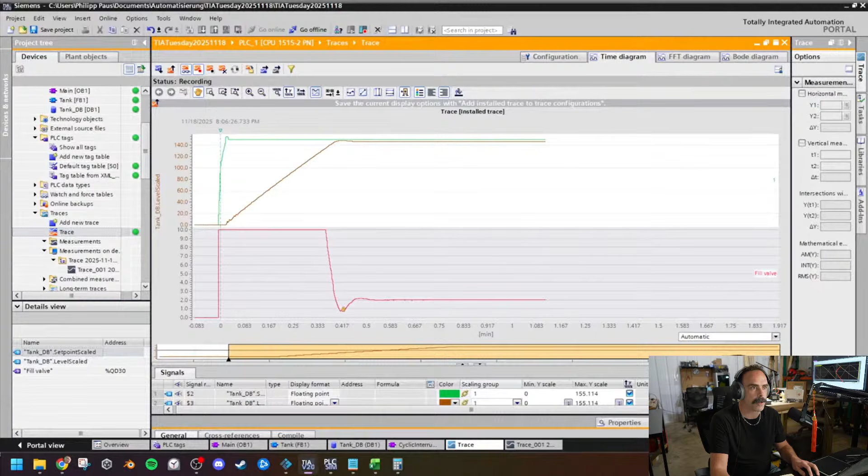Move out of his way. Again, we're reacting to this, but this is on his stream. He's set up this PID controller, and he's talking about some of the functions of how it's actually working. So I'm going to try to get this going, unmute this, and play this.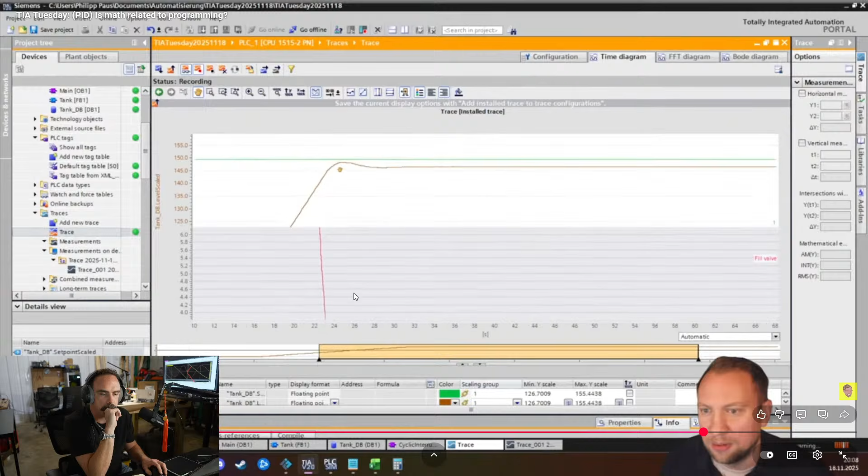This moment is very interesting, relatively speaking. We had a little bit of a strange system reaction here, and unfortunately it's not in the measurement, we cannot see it. So he had just tested it and traced a function testing a different gain value, and then he's got a big simulated pot, and he's going to run another simulation. I forgot to mention that.

What I will do again to emphasize on this, and this is a nice controller right now, is I am going to increase this, let's make it 50. Because I want to emphasize, remember this is all P gain, it's only proportional. I want to see the result, and I want to emphasize on it. So let's see.

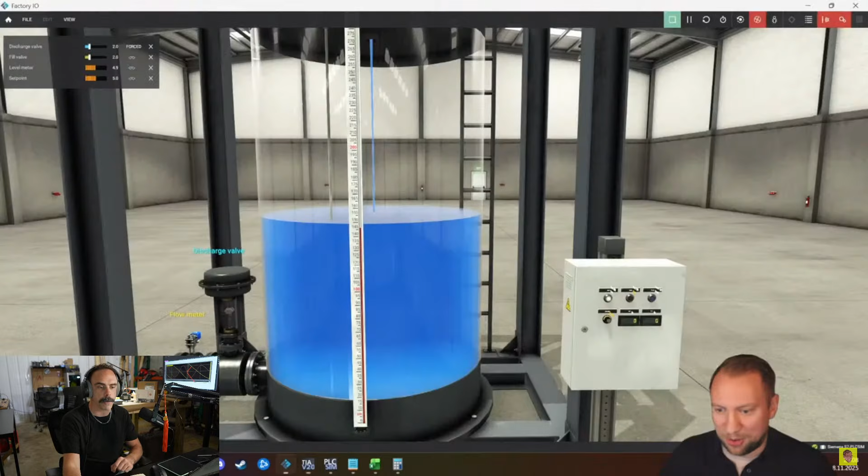Critically damped water tank. Yeah, this is all completely unnecessary right now, but that's fine.

So let me stop the recording. Let me delete the trace here. I should have saved them in the project.

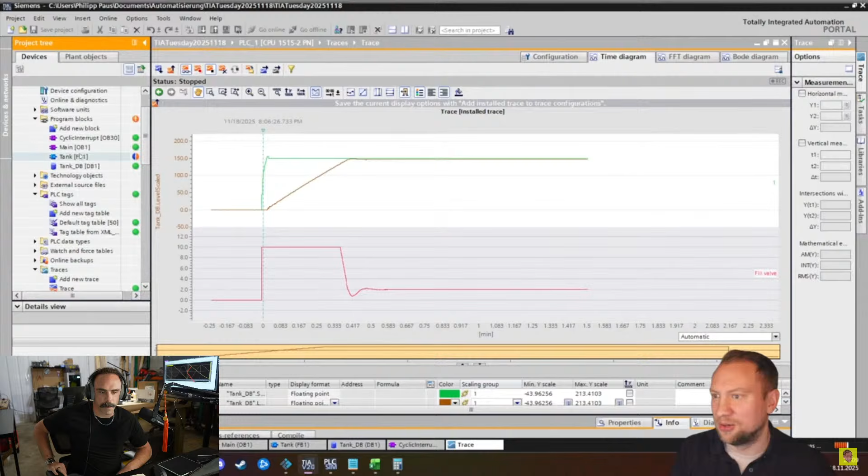You were completely right there. Who said it? Keddy, I think. Yeah, I think I needed to save it. But it's whatever. Did I download the program? The live stream will be available, it's all available on my channel. I never delete anything. No, I deleted something. Why, he's the goat. Nothing that could be useful.

Always useful. So I'm now starting my recording here again.

So now let's go with the 150. So watch this, here it comes. Set point here again. It's pretty sick and awesome. First of all, the software is awesome. Oh, Pranav, yes, that's a good word, that's the word I'm looking for. Right, there we go.

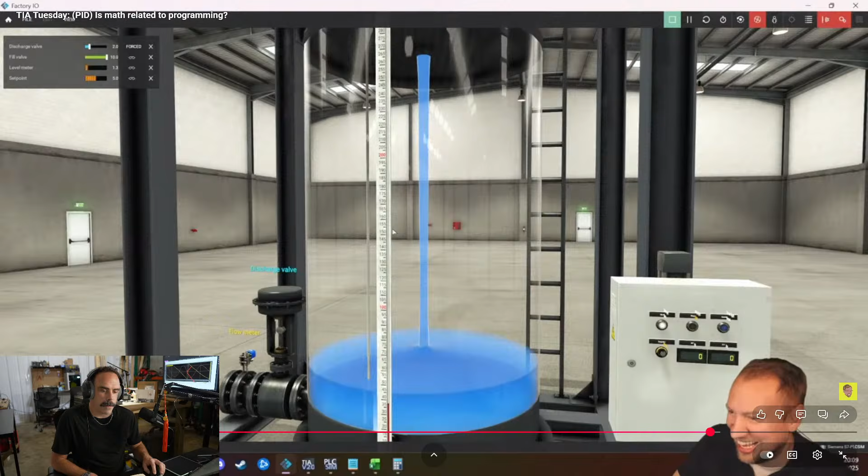So as it starts to fill up, it looks kind of normal. One thing to note about this, it's kind of behind my head here, he has a flow, I don't know how fast it is, but there's flow coming out of this tank, and so it does have to balance out.

And it's something interesting here, because when I was watching it, I was kind of halfway watching it, and when this happened, I'm like, oh wait a second, this highlights something really cool.

Dennis, imagine my side of the story. Imagine, for fun and entertainment, I am doing a live stream. I've never heard that before. Anybody, imagine my side of things. Oh no, but you're right. Yeah, yours is not good. Mine is worse.

This is kind of a good system, though. He starts to see it build up now, right? And this is what I wanted to provoke.

You control the biting point. Is it the biting point? Schleifpunkt in German, Schleifpunkt. But yeah, you're kind of controlling that.

Yeah, so right now, what is happening here in the system? Oh, this is actually a very good example. As it's watching, if you notice, the stream is actually cutting on and cutting off. But really take a look down here at this, at the level. I don't know how physics-based this simulation software is, how it's going.

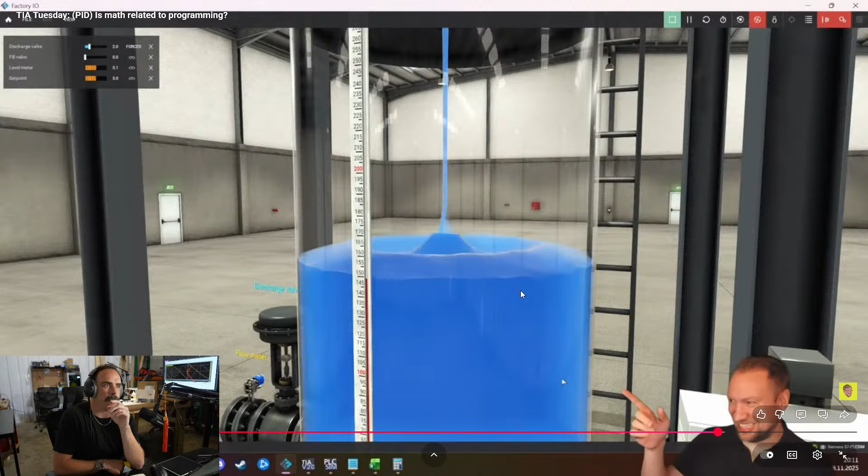Try that. Let's go back to this again, this resonant property here, because it started off and it's like completely flat, and then you could see it just slowly getting more and more. And let's watch it.

Is there flow coming out? Yeah, I have a little bit of outflow. They're up there. Like a little bit of discharge I have, yeah. Yeah, we have oscillations going on. I think that was actually me that asked that question. This is oscillations. Oh no, that's bad.

Let's look. So look at this. This is one of the coolest things, because there is, and he mentions this in the stream, a little bit of lag between the simulation. There's a resonance, and this little graph shows resonance excitation. And we've talked about resonant frequency in mechanical systems, and especially in motion control systems,

you will have some sort of spring constant, some sort of stiffness of your system. And in this case, the stiffness is based on the water, but not just the water, but the diameter of that tube, how fast he's actually going in. And I don't know what it is about this particular thing.

The trace itself is a timing thing, but the simulation, you see that it actually went into basically a perfect sinusoid. What was going on there is the controller was exciting some sort of resonant frequency of that water. And the longer he let it go, the more that got excited, and the stronger it got.

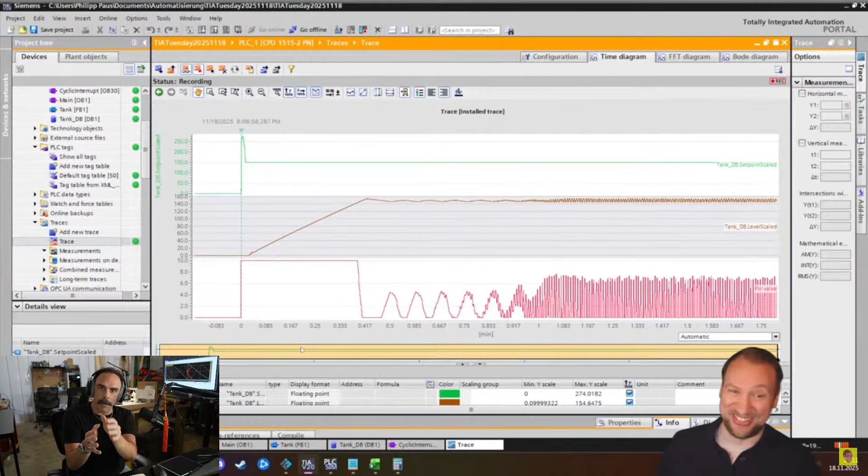And one of the things we talk about is the frequency domain. You have frequency components in every system. And this really shows it well, because there's a small frequency component that gets excited. And the longer that system is running, it starts to excite it further and further. And because the gain is so high, that's when it becomes unstable. And you can see it would go to a maximum.

And I don't even know if it's reaching that, because it's not even having the time to build up and reach that. But you could see that it's kind of going,

oh, Ignatius, great, awesome for church. Definitely. We can watch it later.

So kind of in a motion control system, what you will see in this, you could see it dramatically in the water. We were talking earlier about, what was it? It was the linear resonance. So if you have something that's out on, how do I do this? So if you have a length and you're moving something back here, it is going to kind of oscillate like this. And the stronger and stiffer this thing is, the less this is going to resonate.

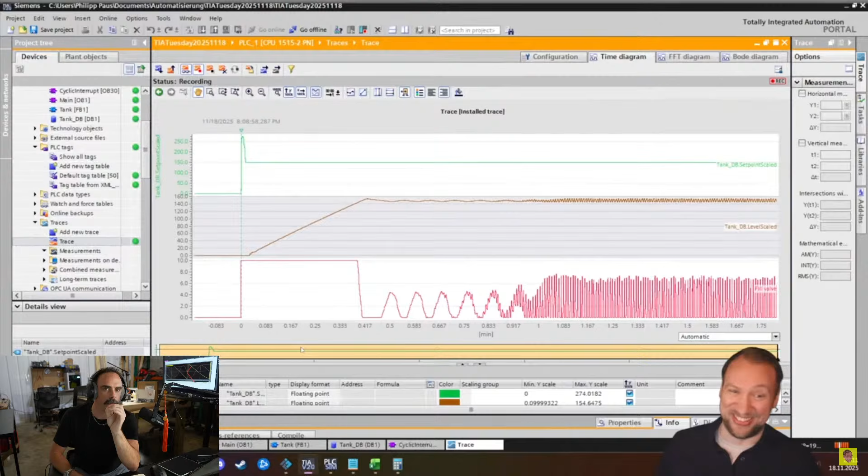You don't want to try and change really fast. You want to limit that speed of how fast you're able to change. Unfortunately, in his system here, it's a pretty slow responding system. Let's see if there's anything else about this. This looks spicy. Look at this. Oh no. So kind of his analysis of what's going on.

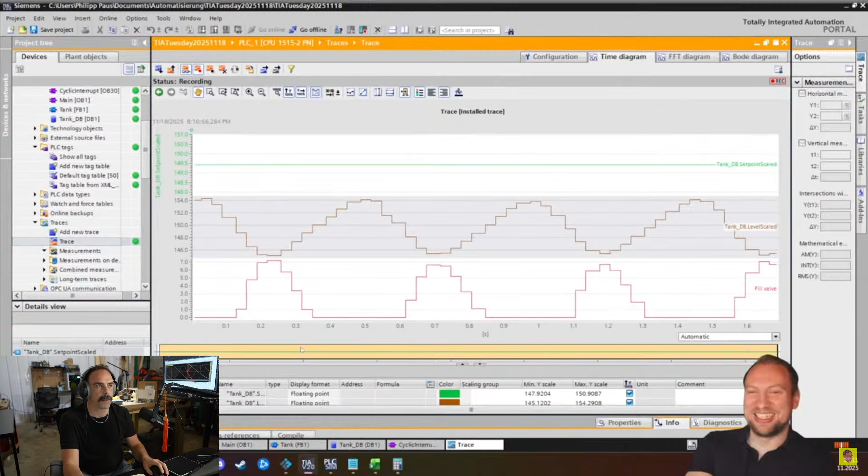The funny uncle version of the PLC class. Oh, I mean, I'll take it as a compliment. Oh, so this is actually a fantastic example. Yeah, so he said that's fantastic.

So you can see here, this brown line is that wave. That's the actual feedback level, because I don't know where Factory IO is actually detecting it from. This is something you would absolutely see in your level sensor if you have a point level sensor somehow, you would see it like this. And in a real tank, you're going to be measuring over something like this, or maybe like this level. Well, in a motion control system, you can more accurately measure the feedback. So you can really get into these systems pretty quickly.

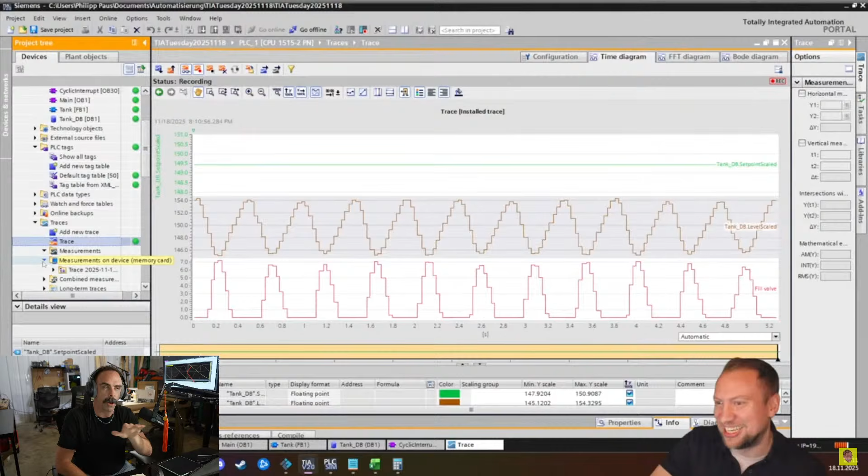I'm going to continue doing this because I think he goes into what's going on, and I'm just going to let it sit and run for a second. Yeah, I do absolutely love this example. You see this? This is right now. My controller. It's not. I mean, it is resonance. Yeah. It is a little bit of resonance going on there. Let's have the scaling in there. It kind of looks okay here, right? But what we start having is we do start having oscillations.

How do I zoom in on just the Y axis? I can't, so it doesn't matter. So we have a little bit of an overshoot here in the beginning. How do I get there? I don't know. A plus. There's a plus icon. I'm an old man. I have to press the plus button now. So here, right? The brown one. So we go a little bit above, and then our control.

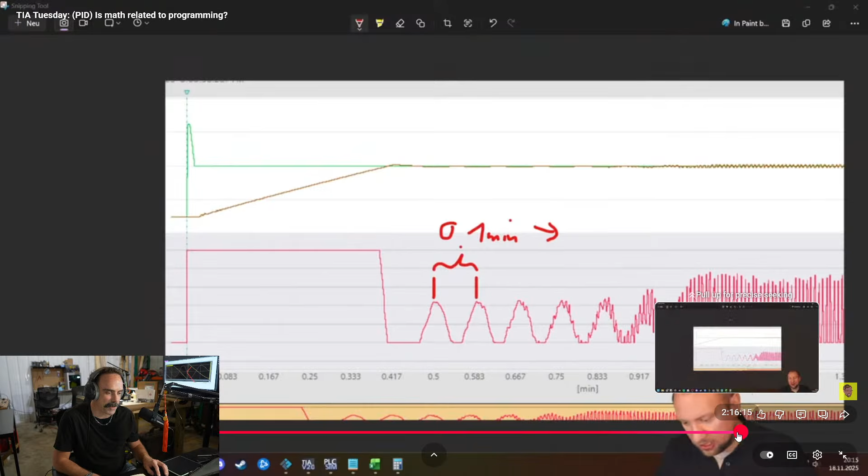Can anyone calculate how many seconds is this? I can't. Wait. 0.1 minutes in seconds. I'm not going to call him out on this one. This is fun. Like tuning the controller right now.

So he goes into talking about how to find the perfect P, right? And the practical implications of trying to find the perfect proportional. So right now, this is only proportional gain. And we had talked before in the stream, and again, I cannot express enough, go back and watch that stream. You got all weekend. But he goes into a very common topic of how should we be trying to tune these systems, and what's the method?

And it's like, oh, in college and in university, you're going to be in these control system classes, and you're going to have, I can't even remember, the root locus and Nyquist. He goes into a couple of different things, and it's all of these different ways to mathematically tune a system. Guess what?

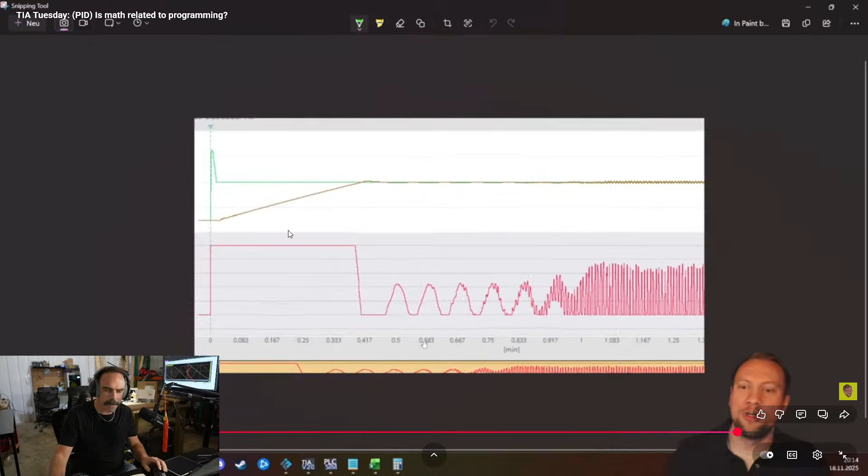Unless your model's perfect, it's not going to win. He goes into it. So let's just watch it for a little bit more. I would look at the difference between our oscillations here. What's the time difference? And I can see the time difference is 0.083. I mean, this is almost perfect here. Almost 0. Maybe 0.1. Let's say 0.1 seconds. Oh no, 0.1 minutes.

Can anyone calculate how many seconds is this? I can't. Wait. 0.1 minutes in seconds. 6 seconds. This is embarrassing. Yeah, this is approximately 6 seconds. So approximately 6 seconds from this part. The smaller oscillations here, by the way, those are now errors in the sensor. So the smaller oscillations don't really matter right now in our case, because this is completely the simulation, and because I exaggerated with the values. So we have 6 seconds.

Now with those 6 seconds, we could put this into a tuning table, right? Oh, by chance, I do have a tuning table. Let's assume this would start happening at a P of 25, a proportional gain of 25. I could test this now if we will have oscillations. So he kind of steps through a couple of different ones to see if you have those oscillations. And what was going on in that particular one was it building up that resonance.

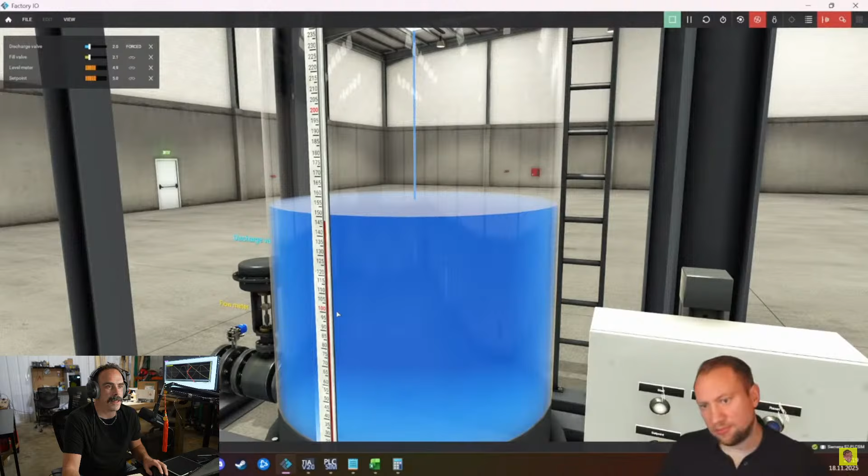My assumption is we will have oscillations now. Yeah, we have a little bit of an overshoot. No, we will not. So nah. Let's say 45, 40.

I really want to show that because I told him on stream that I was going to react to this and he could react to the react. This stream is mostly about the motion control side of it. And one of the things we go into in some of those systems is you may not be able to allow overshoot. In a motion control system, most of the time it's okay to have overshoot as long as you get back down quickly.

Because in a motion control system, if you have a well-matched inertia system, then the motor and the load itself are going to be pretty well coupled. So if your motor is trying to turn against that, you're going to be able to bring down that overshoot quickly. And honestly, he cannot really react fast enough in that system to have a really high gain and it come down. And he has a pure proportional controller too, so that's unfair to him.

So maybe challenge him on this. If you're watching this, Hegamurl, when you get your integral controller, try to overshoot and then use the integral to drag it down. Because if you have overshoot, your proportional and your integral will build up pretty quick. So you're going to have that dragging.